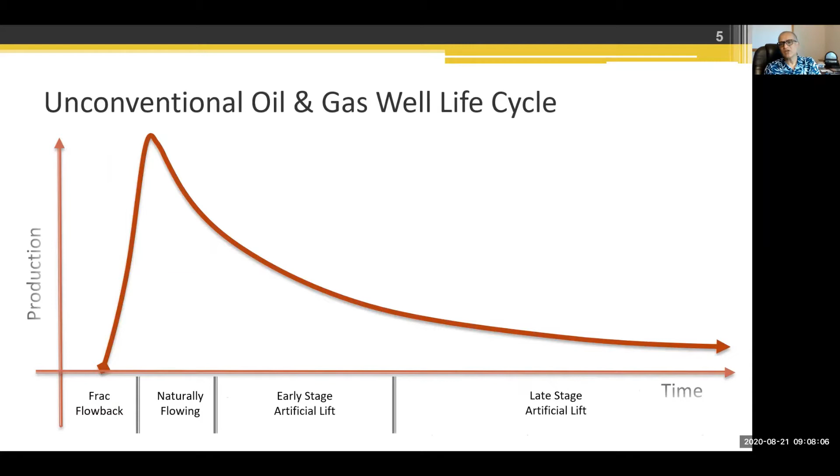But we have to keep in mind that this production decline is what forces us to think about artificial lift. Now, if the question comes up, how many wells in the world are in artificial lift?

The statistics in the US has been fairly constant. World Oil has stopped publishing the statistics since 2018 or so, but roughly every year they come back and say that between 500 and 550,000 wells in the US are on artificial lift. This number has remained constant in the US, and my gut, based on the estimates I see in the literature, is that this number has not changed even after 2017 or 18. On the contrary, that percentage might have gone up, I would think.

Worldwide, this is an estimate from one of the service companies in 2013. The numbers in the US, it says about 540,000 or so. My estimate, based on my consulting work and collaboration with other partners in the world, is that the numbers in the US are fairly static, but the rest of the world, it is increasing rapidly.

For example, I'm working with one Middle Eastern national oil company, and we are looking at just 1,800 artificially lifted wells in one country, and that's just one lift type. I estimate that particular company, that particular country, has more than 2,500 wells on artificial lift, whereas here we are showing almost the entire region having 2,600. I was giving part of this talk in Argentina, and I was pointed out that in one particular basin, they have more than 30,000 wells. So my point is that worldwide artificial lift well population, if I had to make a guess, is close to 1 million or so. And that tells you how important this technology is to the bottom lines of operators.

So why do you need an artificial lift system? You need it in greenfield and unconventional settings for production acceleration. Otherwise, you can say we have field development changes, infill drilling, EOR strategy changes - that's when you'll want to put artificial lift. But the conventional view has been that we need it whenever we have tired production, reservoir pressure declines, water cut increases - that's when things get difficult. I'll come back to this in a minute.

So we need artificial lift to help tired production. But more and more, we are seeing that artificial lift is also used to help green production, meaning for production acceleration. Part of that is also production optimization, when we try to do that.

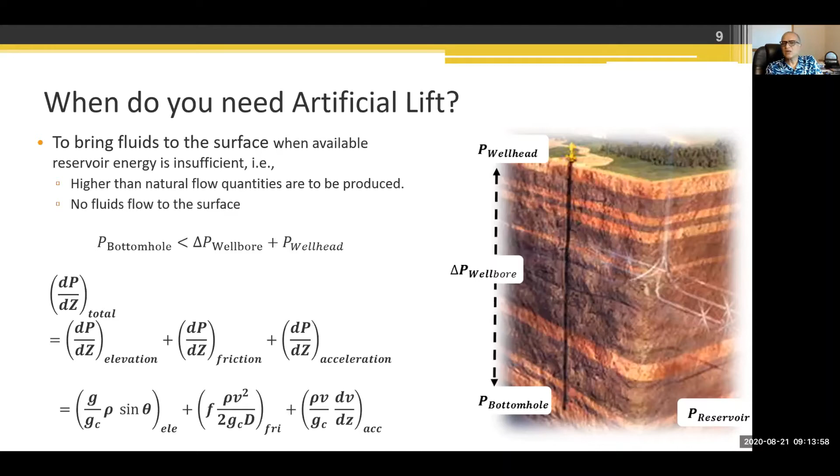So this is the only equation that I'm going to show in this presentation, just to make a point that this is all about the hydraulics of artificial lift. And you have to throw in some electrical engineering or some mechanical engineering, depending upon the lift method that you're looking at. Here is a picture of the subsea.

It is slightly more challenging, but the principle remains the same. You have to account for the well bore losses. In case of subsea, you have to account for the losses from the seabed all the way to the top side. But fundamentally, all you're trying to do is provide what is considered additional total dynamic head, or TDH. So this is one new term.

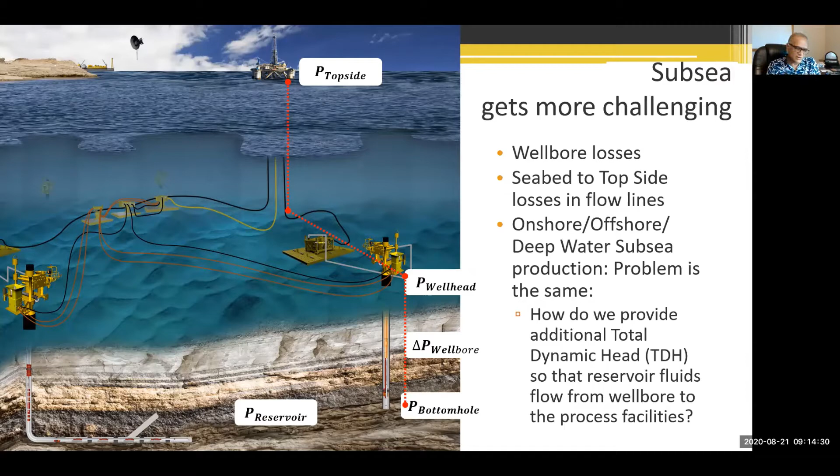You said, wait, you never talked about TDH. What is TDH? Okay, so TDH is, as this picture shows, you have one boundary, which is the reservoir pressure, another boundary, which is the wellhead pressure. Now, this wellhead pressure is influenced by your surface facilities, what type of flow lines you have, what type of separation pressures do you need to hold. So these are the two boundaries that I would keep focus on for the time being.

Then as the fluids flow through the reservoir, you have bottom hole flowing pressure. Most of the artificial lift engineers, they focus on the hydraulics in this area, right? And they typically use a simpler expression for the reservoir flow, which is some kind of Vogel expression or straight line PI in some cases even.

So the artificial lift design or the planning problem is about figuring out how much of this total dynamic head we need to provide. It's not only a design and planning problem, it's also an operational problem, in the sense that once you have lowered the artificial lift in the system, you have to also keep tabs on it, that does it continue to provide this total dynamic head as was promised or not.

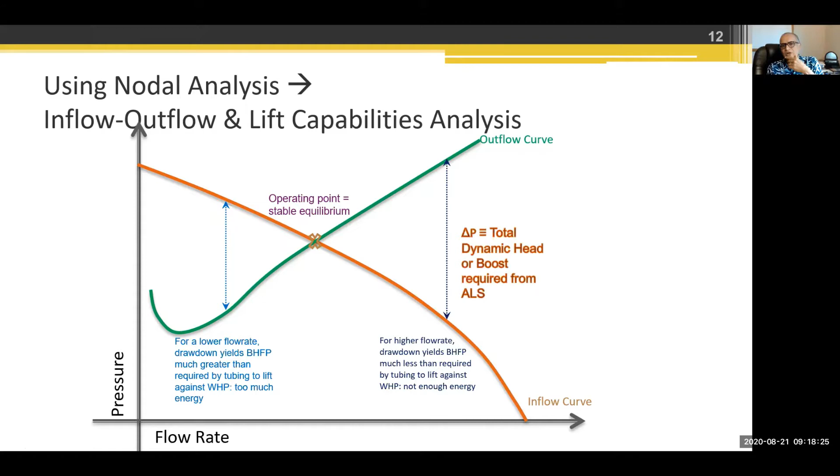So instead of producing this quantity, let's say you want to produce this quantity, then this much of additional boost you'll have to provide. So this is the total dynamic head or boost required from the artificial lift system for that particular flow rate. The actual picture is slightly more complex than that, but for the purpose of our discussion here, this is what I'm talking about.

How one can decide on the lift capabilities or what are the lift requirements, but the nodal analysis is the tool. And again, I cannot emphasize this enough, any of these plots are just at one point in time, meaning one set of conditions: one reservoir pressure, one wellhead pressure, one water cut, one gas oil ratio, one tubing size, on and on. As we all know, things do change. And what changes? I'll come to that in a few slides.

So now let me go to the second part of my presentation where I'll give you some introductory, now that we know why, what, where, when, how of the artificial lift, I will now focus more on how. So I'll give you some idea about what are the different types of artificial lift methods, what are the typical surface and downhole equipment requirements, and some considerations.

This is the part where we'll be kind of sitting in the bullet train as the different stations will pass by. Your takeaways from this section should be that these are all good lift methods when you apply them in the right context. That is one of the biggest problems. Most of the time, people have this mindset that just drop it and forget it. That is what we want to do.

But in case of lift method, what may be good today may not be good tomorrow or over the entire lifespan. So we have to be vigilant about our lift choices, lift operating modes, and lift changeovers whenever any condition changes. Meaning we need to understand our reservoir, we need to understand our field condition, we need to understand what is happening not only in the wellbore but around the wellbore. And this is one area where the lift community is also becoming more and more aware of some of the shortcomings of the approaches.

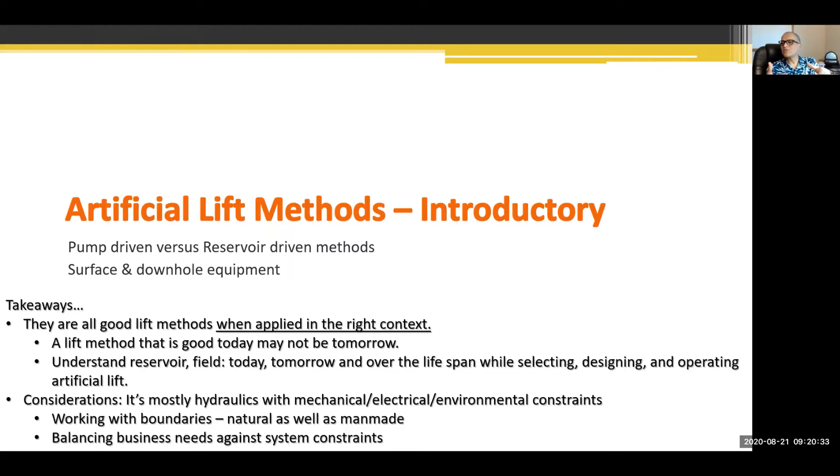So consideration, again I'll repeat this, that most of these lift methods require some mechanical, electrical, and environmental factors. And by environmental, I mean broader than just the Greenpeace movement. We are talking about what is the environment inside the wellbore, what type of corrosivity conditions are there, and that is what dictates what type of chemical program you need, what type of material selection you have to make, and so on.

So when you think about artificial lift method, traditionally what you're looking at are about 7 pictures, but effectively there are 8 lift methods. And I'll put the things in motion. The first one is the rod pump, that is the ubiquitous symbol of the industry, and that is where the maximum number of installations are in the world on this lift method.

I'll not spend too much time describing each lift method. I'm just trying to bring up the picture to give you an idea about what type of different downhole pumping motions occur with different lift methods. So the second one in the middle of the screen right now you're looking at is progressing cavity pumping, or PCP. The third one is the electrical submersible pumping, and this will be in the loop, so you'll keep on seeing what is happening.

The fourth one is hydraulic jet and hydraulic piston pumping. The fifth one is the gas lift. The sixth one is the plunger lift. The seventh one is capillary injection. Let me cut down on some of these volumes here.

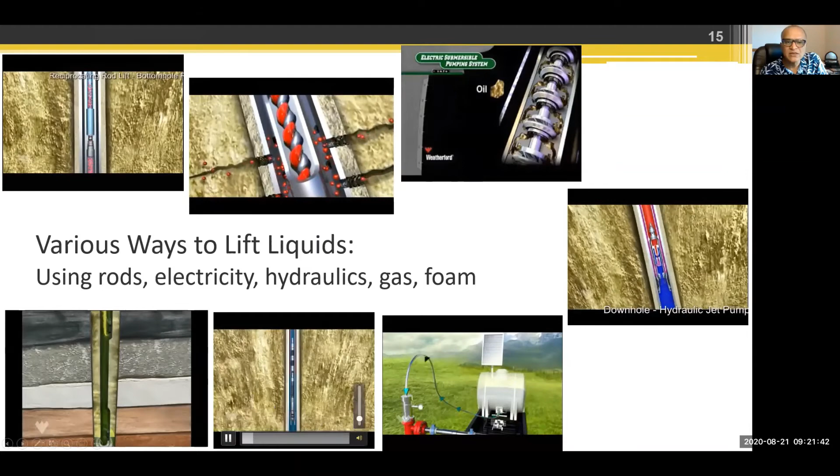Okay, so I'm going to keep this slide for slightly longer than what I would, just to give an idea about how these different lift methods have different surface setups and downhole setups. And we'll, as I describe the other individual lift method, kind of pay attention to that - that if I have to use one particular lift method, do I need a workover rig or can I use it with wireline when I have to repair it?

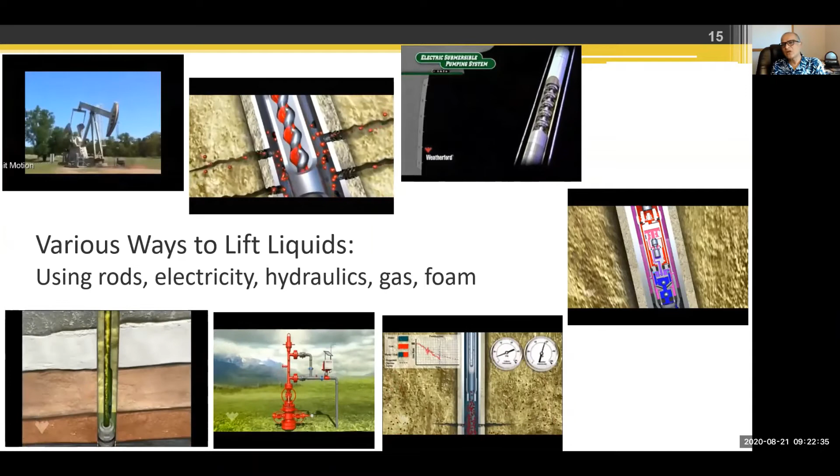And these are the considerations that production engineers need to constantly work with when the lift system is in operation. And here is one thing I'll tell you: most of the production engineers are not traditionally taught these things. They somehow learn it from the old field hands. Because when you go to the engineering school, even if you go to petroleum engineering school, what you're taught are typically just some of the outlines. You're taught some of the design processes very superficially.

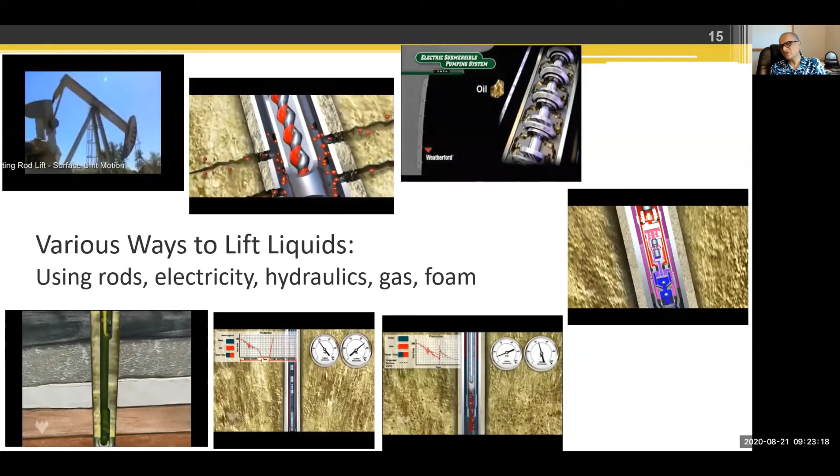I know that because I'm teaching one of those artificial lift classes. But when the same engineer goes to the field, all of a sudden they are exposed to so many field conditions, so many constraints that they somehow get lost, and they end up making suboptimal choices in spite of that training. This is one of the things I've been constantly discussing in the last 15 to 20 years of my teaching all over the world, not only artificial lift, but different nuances of that.

Just a sec, I see something going on in the chat. Hopefully I'm not expected to answer those right now. If we can keep those questions until the end, that will be good. Or, I don't know, what is our protocol? Are we breaking somewhere in between for some questions, or do you want me to say that we can have questions at this point? No, Rajan, as you go on, people can put their questions in the chat anytime, but once you finish your presentation, after that we'll go with the Q&A. Okay, perfect, very good, thank you.

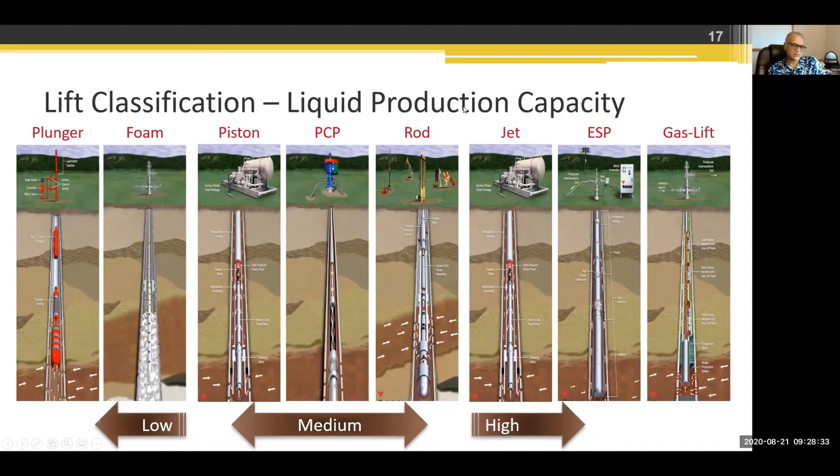Okay, so now I've been talking too much, so there's a quiz for you. Which lift type has the most installations? We're not going to ask you to type your answer. Just pick one of the 8 lift methods we've discussed, which I have listed here, 1 through 8. Mark your answer in your head. Which lift type has the most installations?

And the answer, if you say rod lift, then you are correct. So please pat yourself on the back for me.

The second question is, which lift type gets the most capital? This question came up because I was working for a service company, and we were selling equipment, so we had to keep a tab on which lift method was being preferred. Again, the choices are the same 8 lift methods. Which lift type gets the most capital? Meaning, if you are running a service company, how many equipment or how many millions or billions of dollars of equipment would be sold in which category?

So that is the question. This is on an annualized basis, let me clarify that. And if you answered ESP, that is correct.

And if you see Baker Hughes, Schlumberger, and Weatherford, where they're getting most of their revenue in the artificial lift segment is ESPs. That goes back to my previous slide where I said ESP gets the most capital. To support it further, what you're looking at is again courtesy of the Spears and Associates research report.

What you're seeing is that out of 100% capital allocation year to year, the largest one is ESP, and it has been roughly about 50%. This goes back to 2005. In between, during 2012, 13, 14, rod lift tried to gain some market share, but it fell back, as you can see here.

So ESP is the one that consumes most of the capital that people invest in. The question Rafat asked was what I mean by most capital: if you add up all the spend on a year-to-year basis, the spend on ESP is the highest. It is not just that the technology is more expensive. We can have more discussion on that during the breakout.

Okay, now I have another question. Which two lift technologies produce the most oil? Rod lift, gas lift, PCP, plunger lift, ESP, hydraulic jet pump, piston pump, and foam lift. If you are locked in your votes, I'll move forward. The answer is gas lift and electrical submersible pump.

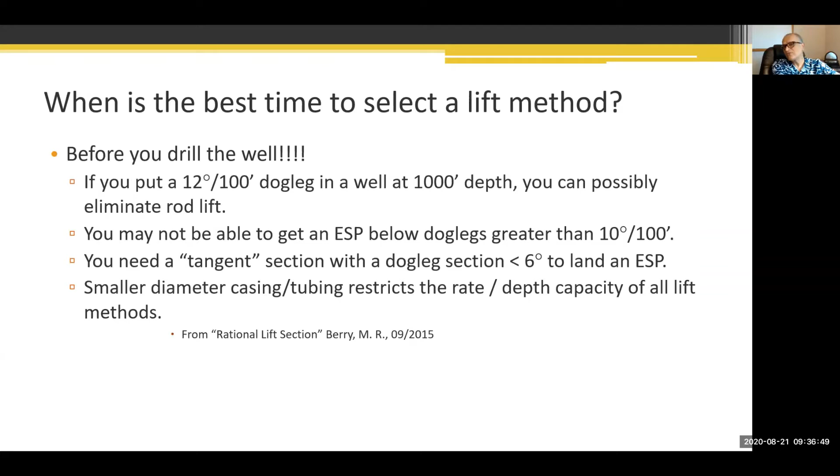So the point is that before you drill the well, you should be thinking about lift methods. Lift methods should actually be part of the field development planning process.

When you think about artificial lift, whether at the selection stage, design stage, or operational stage, you have to look at which type of asset you are operating in: mature field, greenfield, unconventional. Then where this well is located—onshore, offshore, subsea, hot or cold. By hot or cold, do you have cyclical steam stimulation or steam assisted gravity drainage going on? Believe it or not, when I was visiting Kenya, I came across geothermal wells where they were also using ESPs, and those geothermal wells can have temperatures upwards of 200 degrees Celsius.

So you have to think of the location where the artificial lift would be lowered. Location is also important in the sense that if it is very remote or at the top of a hilltop, how do you bring the equipment, or how would people access that location on a regular basis? Then you have to think about what type of PVT and phase envelopes the well would be dealing with year to year—is there too much or too little gas, lots of water coming in, is it heavy oil or light oil, is it sandy oil, or what are you going to do about the nasties like H2S, asphaltene, CO2, and so on and so forth?

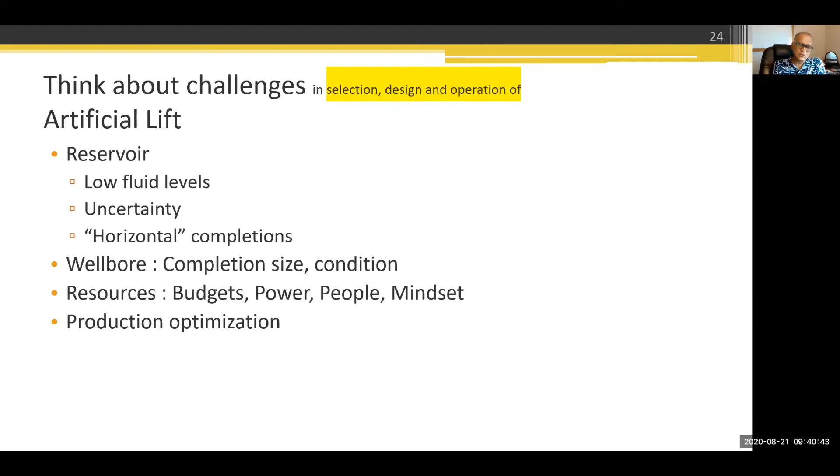So what are the time-related factors that you need to take into consideration when you're talking about selection, design, or operation? As we know, with time, reservoir pressure, productivity, and production is going to go down. Appetite for capital expenditure is going to go down. And then you have competing demands from completion changes, surface facility changes, and there might be enhanced recovery approaches that would require also some CapEx, right?

On the other hand, on the PVT and phase envelope side, you have water cut, GOR, viscosity increasing as the gas comes out of solution more and more. Wells and facilities would age, meaning you have integrity issues, you have flow assurance issues, and then you have to take care of corrosion, scale, sand, paraffin, asphaltene, hydrates, depending upon your environment. So these are all the factors you have to keep in mind as you are designing, selecting, operating artificial lift, or thinking about switching from one to another lift method, right?

Some more factors, as I already touched upon, people and money aspect earlier: your need for this operating resource is going to go up as the wells age, facilities age, right? Whereas the availability of qualified operating resources will go down. Think about it - as you look around operating companies, where are most of the qualified people sitting? In the field development group. And once the field is in operation, what quality of people are sitting in the production side of it? You do not have as many, unfortunately, at least that has been my observation. And then, as I said earlier, appetite for adopting different approaches, if it doesn't go down, it does not change. That is what I see, right?

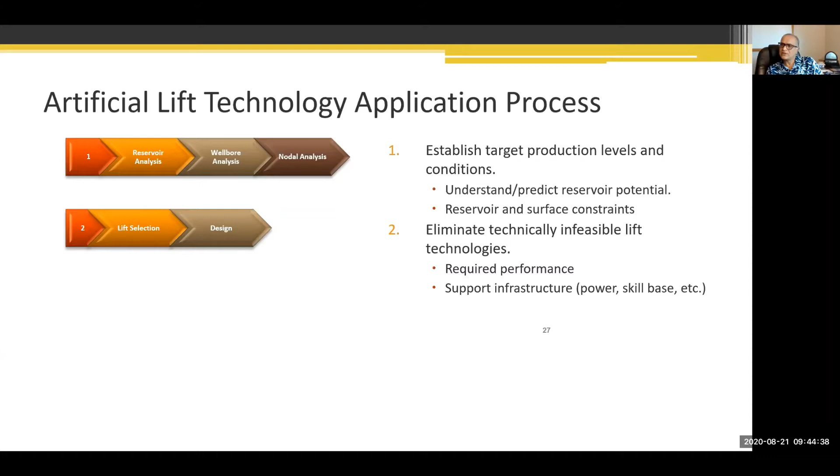What I'm seeing often is that this design function is being transferred increasingly to the service companies. Operating companies are saying, hey, you go and do it. Now service companies have different competing pressures. I was part of that, so I know what could be positive and negative there. That's where I'll stop with my comment.

Then comes the economic evaluation. You have to look at not only acquisition but training cost, installation costs, how we are going to change our people to adapt to the new lift mindset if we are putting in new lift. What are the operating costs? What is the reliability of the equipment? How are we going to replace them if needed? These are all considerations that need to go into artificial lift technology, whether you're selecting it, switching over, or already operating it.

And the final part, the optimization approaches. This is where digital oil field related concepts come in, and I can start throwing all the acronyms I've alluded to: AI, ML, dashboards, edge devices. But the idea is getting access to how my well is doing now, what I need to do so things do not fail, and what I need to do so things continue to work the longest possible.

If you're interested in pursuing this further, this is a list, a rather incomplete list, of commercial software available out there. Notice that there is not just one software that addresses most of the lift methods. Somebody may agree or disagree with me, but in my experience, each software will have its own niche area, and this landscape is changing.

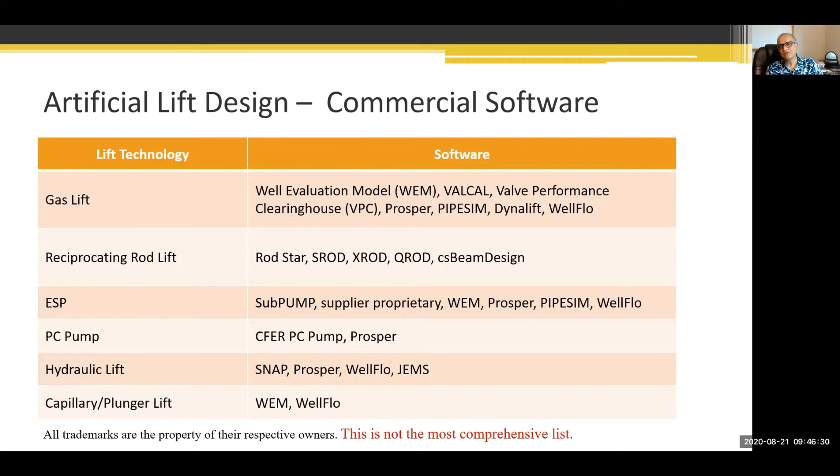Having said that, I must also remind that the vendor community, the people making this equipment, have come a lot farther and are being constantly challenged to push these boundaries even further.

So what I was trying to point out here is some of the lift optimization equipment. For all purposes, you are seeing that this is a normal wellhead, except there is some additional line going to the backside or on the casing side, if you see here, right? And that is the injection gas.

Okay, so gas lift is the first lift method, kind of an extension of a naturally flowing well. In a naturally flowing well, the fluid column weight is reduced as the formation gas comes out of solution with the change in pressure and temperature, as you're seeing on the left side.

Now, in gas lift, what we're trying to do is enhance that process by injecting gas - most of the time natural gas, shown in green here - into the casing-tubing annulus. That gas enters the valve bore through a special configuration called a mandrel, and there's a device, the gas lift valve. The purpose of the mandrel and gas lift valve is to regulate the flow of gas inside the flowing stream, which in this case happens to be the tubing.

Now keep in mind, gas lift can also be applied in reverse configuration, meaning you inject the gas into the tubing and produce the fluid through the casing-tubing annulus. So if somebody tells me their gas lift well is producing more than 6,000 or 7,000 barrels per day, most of the time I can bet money and not lose it by saying that's an annular completion, meaning the production is coming out of the tubing-casing annulus.

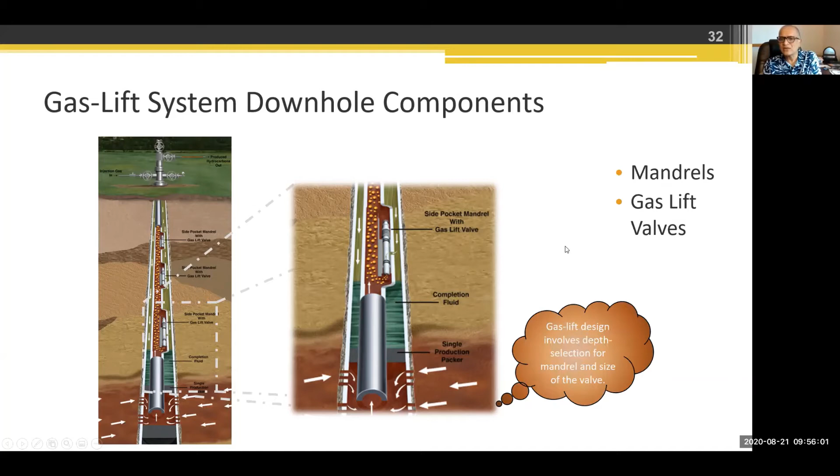So the design problem for gas lift, as far as the wellbore is concerned, is at what depth we should lower this mandrel, what size of valve we should lower in, and what should be the orifice inside that gas lift valve, and what type of gas lift valve. Other design decisions could be what should be the available injection pressure, because that also determines at what depth we can lower it. And then there could be a whole host of other decisions, what type of compressor you have to use. But this is not my gas lift class, so I'll just stop myself. So the design involves depth selection for the mandrel and size of the valve. That is just one simple thing.

Most offshore installations, or installations where it is expensive to service the well by workover, would go for retrievable mandrel type of installation. Most onshore wells go for conventional mandrels because conventional ones are cheaper.

Here is a brief outline on what type of wellsite gas lift equipment there is. This is more of an advanced setup. It is not as advanced as I would like it to be, but still it is advanced. Most of the time we have some type of two-pen chart recorder. That was in old days. If you are old enough to remember that, then join my company.

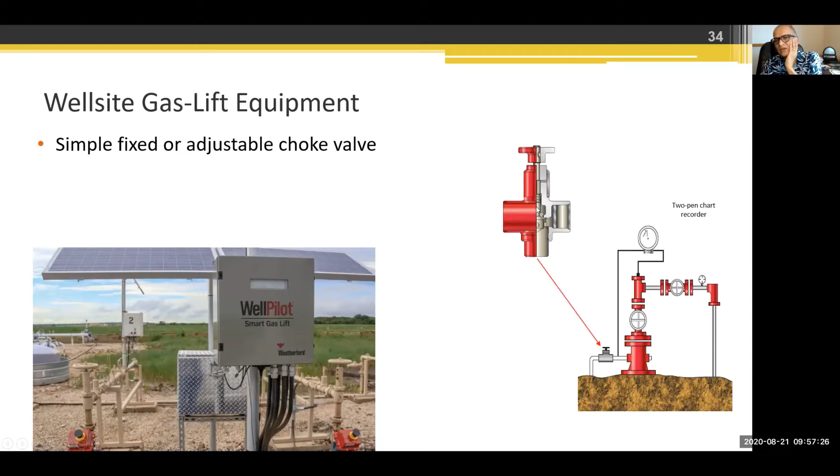And then you have some sort of injection choke here. Now this choke could be manual or it could be adjusted from a remote location. There could be a time cycle controller based choke. The whole function of this choke is to regulate the flow inside the casing-tubing annulus, and it is managed by measuring the differential between the tubing pressure and the casing pressure, and such. So this is a brief intro to the gas lift.

And here you are looking at the gas lift wells on the pad. What you're looking at here is all the measurement related to gas lift injection quantity, how much we are injecting in each of these wells. That's what you're seeing here. So this pad-based development requires you to have some compression facilities on the pad itself, unless you have some centralized compression. And these are some of the debates going on in the production engineering community, particularly as we now have these super pads coming up with 12, 15, 20 wells on one pad and so on and so forth.

There are two types of gas lift: continuous gas lift and intermittent gas lift. Most of the time when people say gas lift without qualifying it, they mean continuous gas lift, meaning you are injecting gas into the production stream continuously. In intermittent gas lift, you are injecting intermittently.

So what do we want to achieve in continuous gas lift? You want to inject gas through the lowest possible gas lift valve. Lowest possible gas lift valve, that should be our goal. We want to prevent multi-point injection, meaning we do not want to waste gas whereby gas enters at multiple points at the same time.

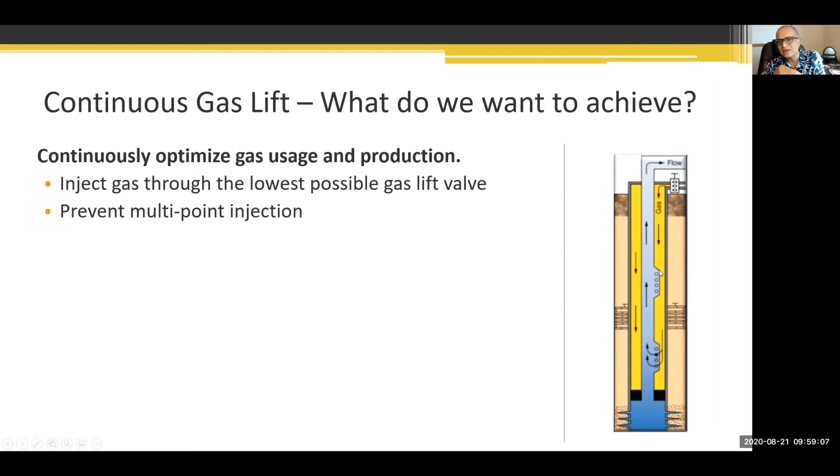We want to enter it only from the deepest possible point, because that is when you are utilizing the energy most. You want to provide the optimum amount of lift gas. Too little gas means your production will not be coming out as much, so there is a production deferment. Too much gas, you're wasting your compression energy at the surface, and that gas is not contributing. On the contrary, in some cases it can contribute to friction losses that you do not want.

So this whole slide talks about what is a continuous gas lift optimization problem. Details are always devilish, as somebody says. There are lots of things, but gas lift is one lift method where you have to have a very strong understanding of hydraulics as well as reservoir performance and surface network performance.

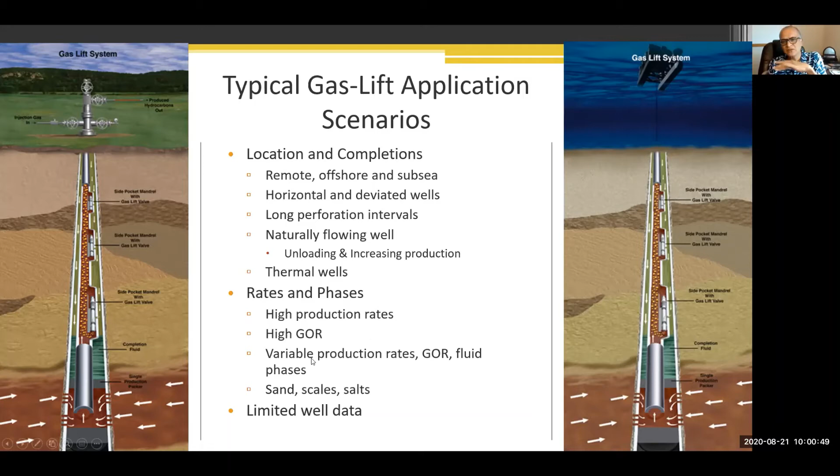Typical gas lift application scenario: on the left side you are looking at a picture from Weatherford about surface onshore gas lift. On the right side you are looking at some subsea gas lift. So the point being, gas lift has been used in all parts of the world, remote locations as well as subsea locations. It is used in long perforation intervals. Naturally flowing wells also use gas lift on an intermittent basis. In lieu of swabbing, people sometimes just trickle in some gas with a nitrogen cylinder to kick off the well, for example. In thermal wells also they use gas lift, and these are the typical gas lift application scenarios.

High voltage situations - you're looking at voltages in excess of a few thousand volts, downhole voltage. So this requires qualified electrical engineers' intervention in addition to the petroleum engineers' intervention. What you're looking at is a cable that is strapped typically on the outside of the tubing, and that cable goes all the way to the bottom. There's a motor here.

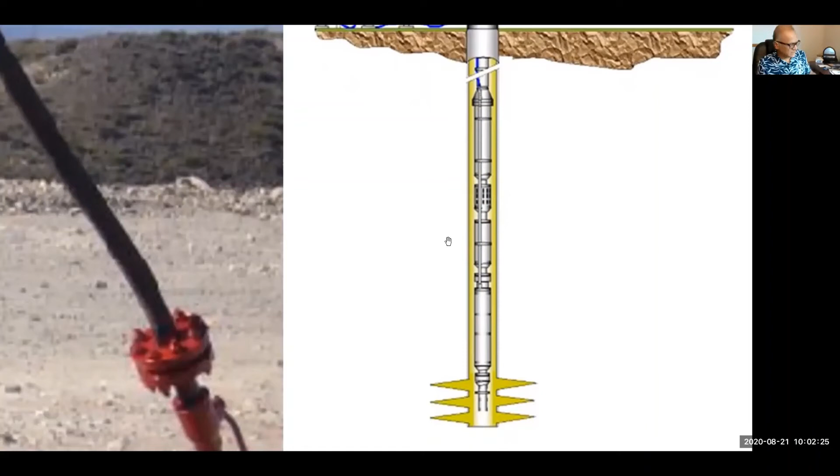Starting our journey from the top, there's a cable that comes outside from the tubing. At the end of the tubing, typically the entire ESP assembly is hung. The topmost part of the assembly is called the pump - that is where most of the lifting work happens. Then there is an intake. There may be a gas separator device here also. Then there is something called a motor seal or motor protector, and then you have the motor. So the motor is at the bottom in the conventional setup.

And then you have a downhole sensor package. ESP being some of the most expensive installations from the beginning, they were the first artificial lift method to get downhole sensing packages. Nowadays people are lowering downhole sensing packages in most all types of lift methods, but ESPs were the first one. The reason being that the power cable can also carry the signal from downhole to the surface. So reservoir engineers also love ESPs because they get to keep their fingers on the pulse of the well.

Coming back to the machinery itself, it's a submersible pump like what you might have seen in some water-producing wells, except these are highly sophisticated devices. Visualize you have about 5 to 6 inch outer diameter, and you're trying to generate a total TDH, or total dynamic head, to the tune of almost 2 to 3,000 PSI, which is equivalent to about 7,000 or 8,000 feet of water column. These are very smartly engineered, and the basic design has not changed over the years. The material of construction has changed a lot, and systems are now available that can handle some of the harshest conditions, and can also operate over the widest range of flow rates and flow conditions.

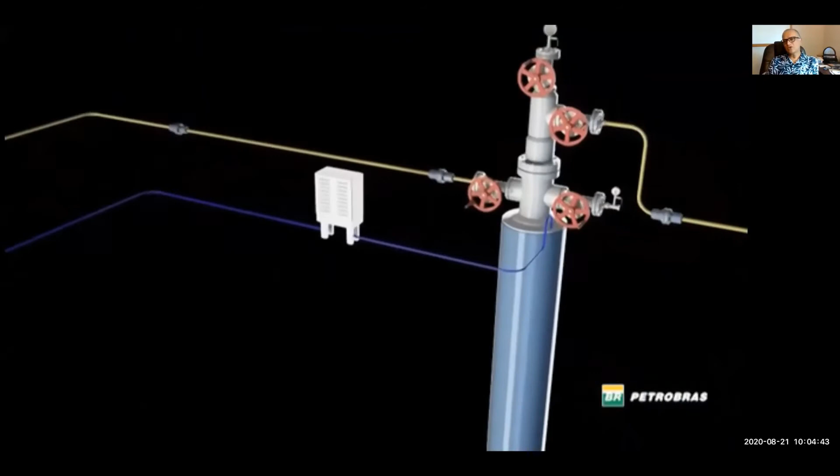Here is a small animation that was originally prepared by Weatherford, and then Petrobras went in and made it with slightly better colors and better music. What you're looking at here downhole is how the cable has come in, shown in blue. You have the pump, you have the separator, and you have the motor. You'll get some words in Portuguese here.

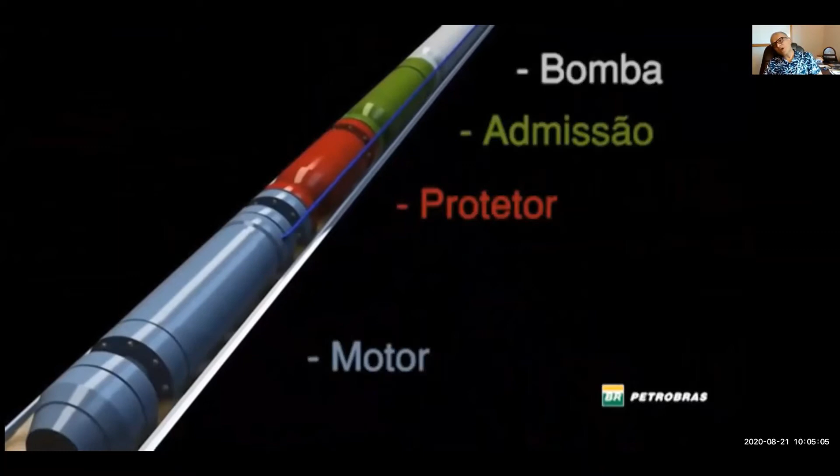Bomba is a pump, admissão is intake, and protetor is the protector or seal section.

So the motor is energized, and a shaft inside the motor starts turning. This shaft is coupled to the shaft inside the protector section. The expectation is that the gas and oil mixture will come inside the intake section, shown here in green. If there is separation going on, the gas will come out on the annulus on the back side. And now you have a pump section, which is a centrifugal pumping device, basically. That is our very quick understanding of how this device is supposed to work.

So the takeaway is that you require a significant quantity of electrical power. You have to connect those devices inside the wellbore, which are hung at the end of the tubing. Meaning, if you have to change the ESP or it fails, you have to call a rig on the well site. This has been one of the biggest concerns of some of the companies of the world, Saudi Aramco's and Kuwait Oil Company, companies that have some of the largest electrical submersible pumps, including some companies in the North Sea as well as Gulf of Mexico and Brazil.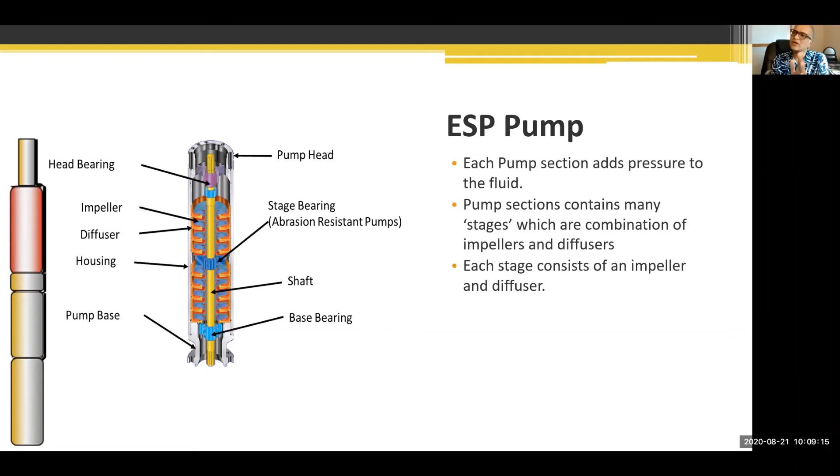Okay, here is a bit on electric motors. There are significant advances in this technology. Traditionally, it has been induction motors, squirrel cage, 2-pole, 3-phase type of motor, run at 60 hertz here, 50 hertz in other parts of the world. But it can run over a wide range of frequency, and that is what allows us to produce different quantities of fluids from the wellbore if you have what is called a variable speed drive at the surface. The relatively recent advance in this technology has been the introduction of the permanent magnet motor, which is more energy efficient and shorter.

Shorter assembly length is very important because as we go through some of the deviated wellbores, some of the horizontal wellbores with extremely high dog legs, you require as short an assembly as possible. So your question should be, what is the assembly length in this case? It could be as high as 100 feet, 150 feet, 200 feet, depending upon the number of stages you require in order to produce the quantity.

So ESPs have some of those challenges. Of course, ESPs are also used in some of the most challenging environments, like up north of the border, where they are producing bitumen using SAGD, steam assisted gravity drainage, and there the temperature could be as high as 450 degrees Fahrenheit or 250 degrees Celsius. This is where ESP vendors have come up with designs that can operate in those harsh environments.

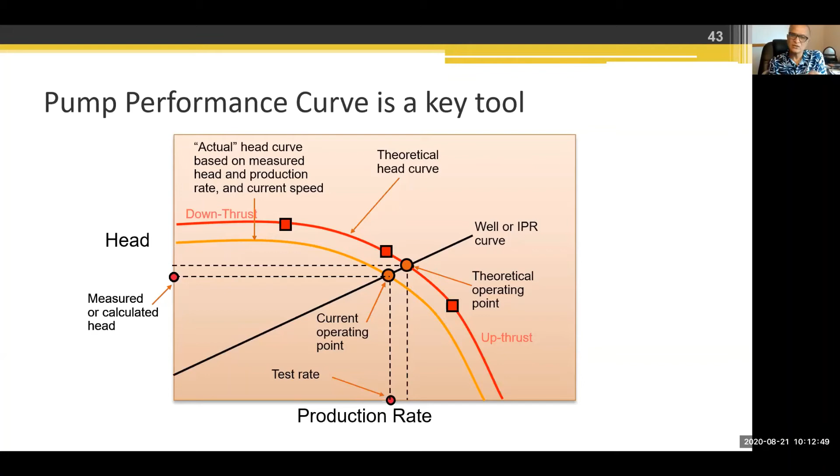You can also keep an eye on pump health. By the way, one of the major initiatives in this space has been ESP failure prediction. If you scan the literature, all these big data analytics firms that come talking about introducing efficiencies will invariably gravitate towards how they can save money by predicting when the ESP is going to fail. I've been involved in one of these projects with a Middle Eastern operator for over a year now. It's an extremely complex problem, but because of the cost involved in bringing new equipment and replacing equipment, people are very sensitive to ESP failure. Not that they mind it failing, it's just that when it fails, they are left with lots of deferred production. So there is a lot of activity going on in that area.

Typical ESP application, as I said, is high volume, that is where ESP really shines. If you are assessing a well that is going to produce upwards of 3,000 barrels, it behooves you to seriously look at ESP. Now, I'm not saying that you should go ahead and put the ESP, but you have to take a serious look at it.

There are competing methods also. ESP is used not only in oil and gas, but also in mining and water wells. Actually, some of the largest ESPs are in mining applications, where those ESPs can remove as much as 150,000 barrels of water out of a mining shaft in a matter of days. As you can see, mining shaft volumes can be significantly higher.

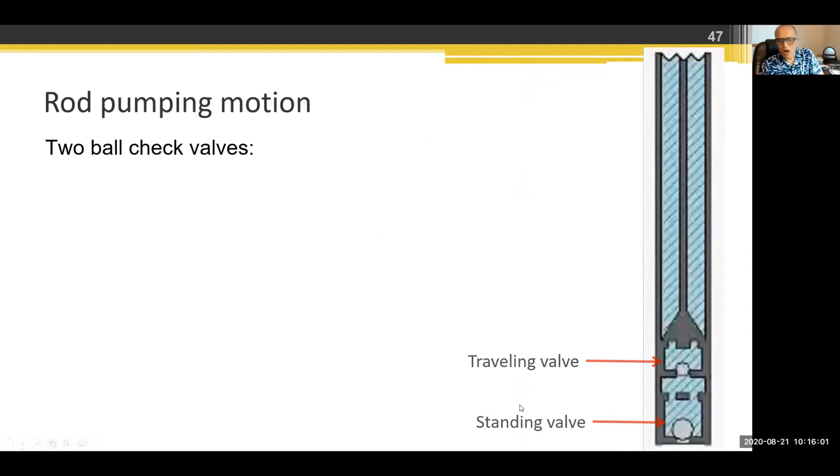So it has 2 valves inside, called a traveling valve and a standing valve. I could not help but show this, how the fluid from below the pump enters into the pump chamber, and then the synchronized motion between these 2 valves, traveling and standing valve, allows transfer of that fluid from inside the pump chamber to above the pump chamber. This immediately tells you that as this traveling valve moves up along with the cage and the rods, we are only producing during what is called the upstroke.

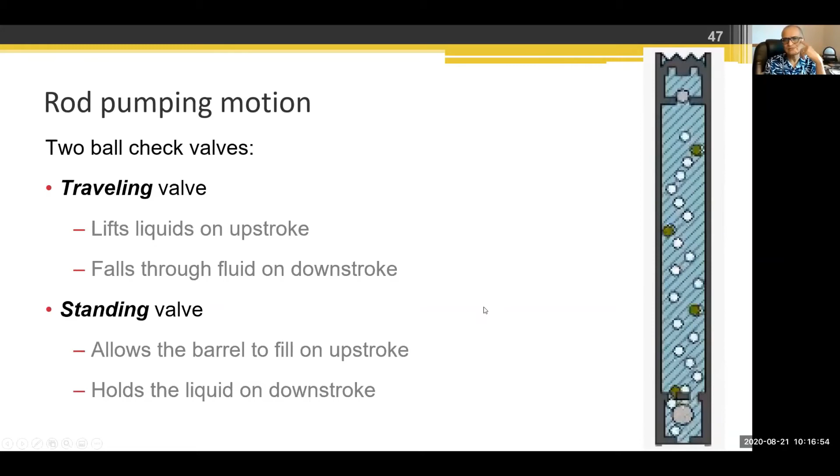Why is this lift method so popular? Because most of the investment for this lift technology is on the surface, that's easily accessible, number one. Number two, the mechanical device is relatively simple. There's a gearbox at the surface, and then there are some lever type arrangements, class 1 and class 3 levers. So all you have to do to maintain this device at the surface is change the gearbox oil on a regular basis, and provide some lubrication for the bearings that are there. That makes this—plus at the end of its useful life, you are still left with lots of iron that can give you some value.

So which part of the world will you not have somebody who can change the oil in the gearbox or grease some bearings? That is one reason why I still come across some pumping units that were developed literally in somebody's backyard in the 1930s. If you go to the Bakersfield area, where Chevron and formerly Occidental were operating, you'll come across some of those older devices that are still working. That's the beauty of this lift method.

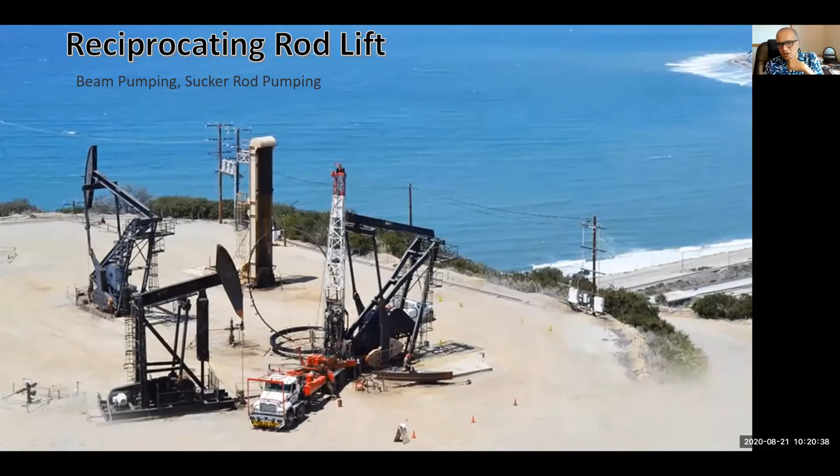So here, similar to the coil tubing setup, they also have a coiled rod setup. There is a gooseneck, and you are literally injecting the rod inside. So that is a different type of rod mechanism. So let me now move further.

So what do we want to achieve when we have a rod pumping machine is you continuously produce as much as the reservoir will provide. This is a key thing, because rod pumping systems are working on wells in this part of the world. Most of the wells on rod pumping do not produce continuously because your reservoir is tired. So you let the influx come in for some part of the day, liquid level builds up, you run your pump, and then you shut it down and let it rest and let the reservoir catch up a little bit. So that is how the majority of the wells work, but then there are some wells where you can produce continuously, right?

And in some cases, if you have what is called a variable speed drive, then you can increase the pumping speed when the well is capable of producing more than the lifting capacity that was sized, right?

Then there are a few other considerations, what is called a fluid pound condition. Especially if you have a tired production, it is possible that as your pump keeps on working, the reservoir would not fill up the entire pump, right? In that case, what might happen is that as your plunger is going down, it will hit an empty space that is not filled with liquid, and then all of a sudden it will hit the liquid. And that is called a fluid pound.

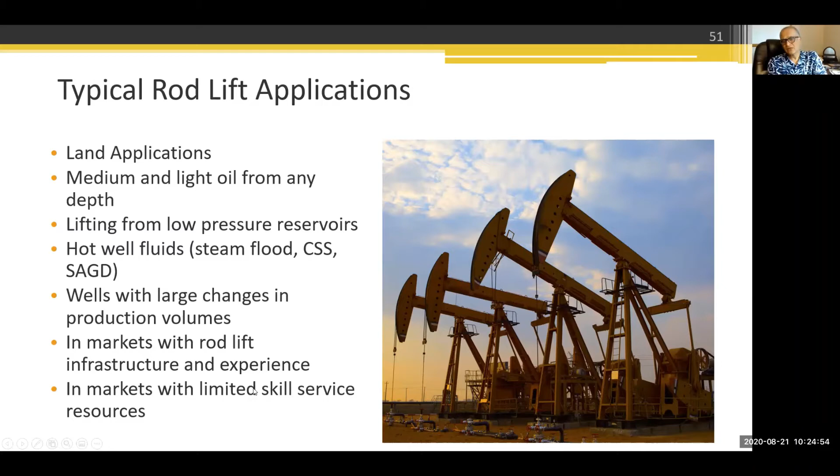This setup is required because you have to route the hydraulic fluid down the wellbore to drive the pump that is basically providing the TDH. What is hydraulic fluid? Most of the time it's water, but after a while it is water mixed with the well fluid, so it is essentially the well fluid.

So when you look at the entire setup, what you're doing in the hydraulic lift is using a highly pressurized liquid, and you are pumping it from the surface to drive a downhole pump. On the surface, you have a setup whereby you can have some kind of separation facilities, with a triplex pump or diaphragm pump that can pressurize the liquid to higher pressures.

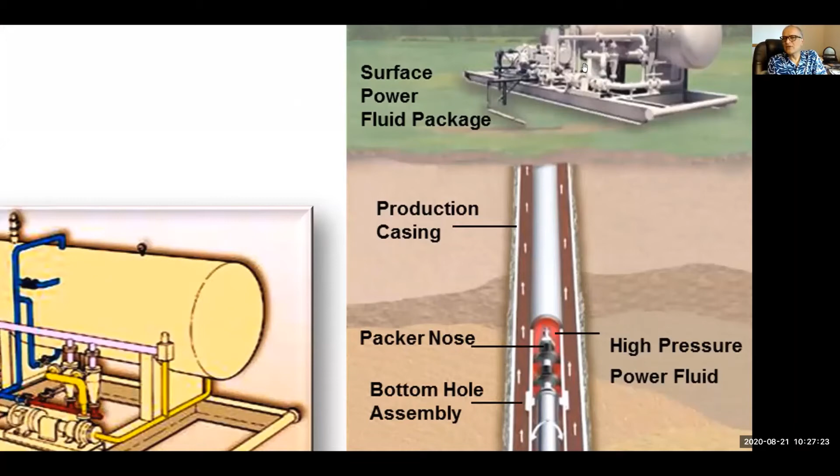Here is another picture from Weatherford showing how, in this particular case, the red color is the power fluid. That's the convention. The power fluid is injected inside the tubing, and there is a bottom hole assembly in which the pump sits, either a piston or a jet pump. The pressure is built up, and you get a mixture of the power fluid with the well fluid, which is coming from the reservoir. So the pump provides the necessary TDH to bring both fluids to the surface.

This lift method was somewhat marginal until the beginning of the century. When horizontal wells and the unconventional revolution started, jet pump particularly became one of the lift methods used heavily for initial kicking of the well, because we are pumping so much fracturing fluid down that needs to be evacuated before production can begin. That is what completion companies often do.

There are two types of pump possible: the hydraulic jet pump and the hydraulic piston pump. The hydraulic jet pump is like nozzle venturi devices used in measurement, relying on momentum transfer from power fluid into the wellbore fluid to get higher TDH. On the right side, the hydraulic piston pump has pistons driven by the power fluid. Both are hydraulic, but the jet pump has the ability to transfer larger volume.

Typically the jet pump is in the upper end of the spectrum, whereas the hydraulic piston pump is in the same spectrum where rod lift and PCP sit. This hydraulic piston pump is good for up to maybe 1,000 barrels or so of liquid production, whereas the hydraulic jet pump can be used for much more—one of the largest installations I know of, offshore subsea Tunisia, was 32,000 barrels per day type of production.

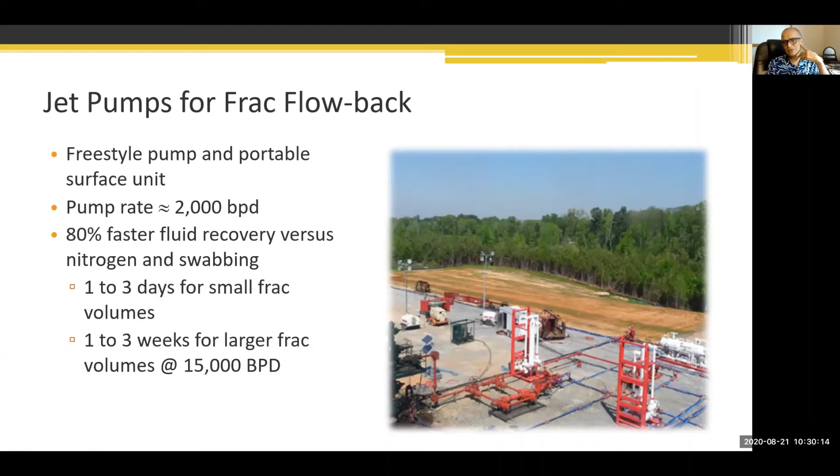The idea is that if ESP is not strong enough, or if ESP has failed, then jet pump can continue to work. The beauty of jet pump is that you can retrieve it just by circulation. You do not require any big workover rig, or you can do it by wireline, but most of the time people do it by circulation. That's why jet pump is preferred in many of these installations.

So that is a brief on the hydraulic pumping method. Now let's move on to the next lifting method, which is a progressing cavity pump. People often refer to this as progressive, and I have a beef with that. I don't think that is the correct nomenclature. It's a progressing cavity, and you will see why I'm insisting on that.

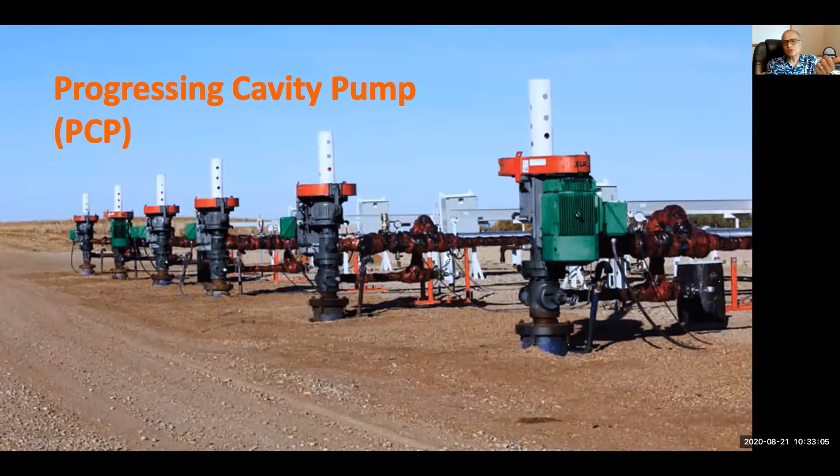Again, what you're looking at is called the drive head at the surface. There is also a polish rod and stuffing box. This rod is rotating, as I said, not reciprocating. Downhole, what you're seeing is a similar rod string, except the couplings used here have a different requirement, because they face a lot more torque variation compared to the sucker rod pump. Then at the end, you have what is called a PC pump, or progressing cavity pump.

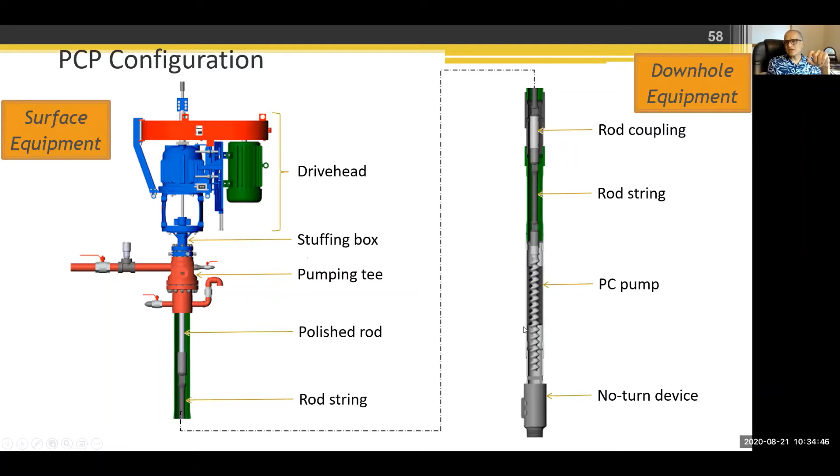So there are two components, as I was saying: this is the rotor and this is the stator. The stator is typically of elastomeric construction, bonded to a steel tube, and this steel tube is hung at the end of the tubing. So just like ESP, if you have to change the PC pump, you also have to pull out. This is a traditional application. Nowadays we have a new application whereby the entire pump is suspended at the end of the rod string, but those are few and far between.

What you're looking at here - the rotor - is typically a helical structure with one lobe, and the stator is a complementing helical structure but with two lobes. Now, if you've worked in the drilling side of the business, you might have seen some of those mud motors. There too you have helical structures like this, but there the number of lobes is more than one.

And that's why the name progressing cavity pump. When people say progressive, it kind of gets to me for that reason, that these cavities are progressive, but here it is progressing.

Okay, so that is the PCP related downhole motion animation that I wanted to show you. As you can see, this is a highly complex motion, so the design considerations are totally different when compared to other designs. This is something you must be wondering as you go through this different lift method, different types of pumps, that how each pump differs from another one in the way they generate the total dynamic head.

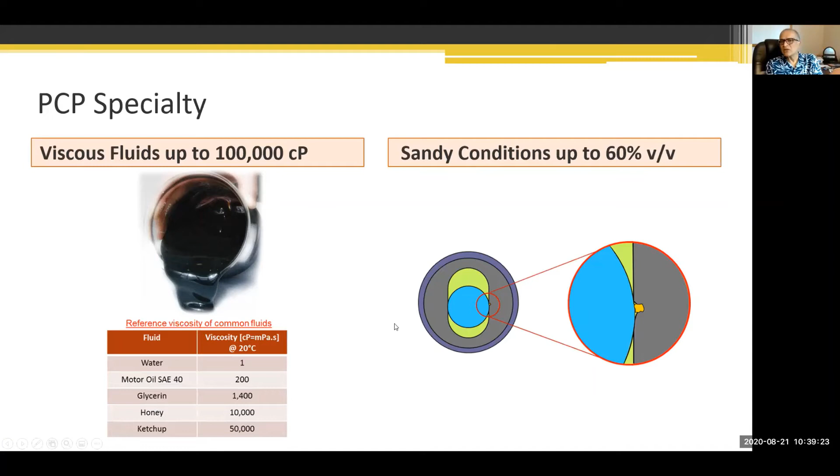I have also seen PCP being used in lighter oil production situations, but there the challenge is finding a compatible elastomer, okay? So the thing about PCP systems is that it is one of the least forgiving artificial lift methods. If you have not done your homework, the PCP can fail in a matter of just a day or two.

But coming back to the PC pump application, just like rod pump, it is also land application, for the same reason, meaning you have subsurface safety valve that cannot close around the rods reliably. It is used typically for heavy oil, but it is also used for medium and light oil. The nasties that really impact the PC pump are CO2, H2S, and BTX. BTX is an acronym for benzene, toluene, and xylene, the aromatics that can impact the elastomer significantly, okay?

To counteract that, vendors have come up with systems where your elastomer is made entirely of metal, so that BTX, CO2, or H2S does not impact it heavily. But those are, of course, very expensive devices, and secondly, it defeats the purpose here. It cannot handle the sandy conditions as well because of the lower abrasion resistance that a metallic stator would have, okay?

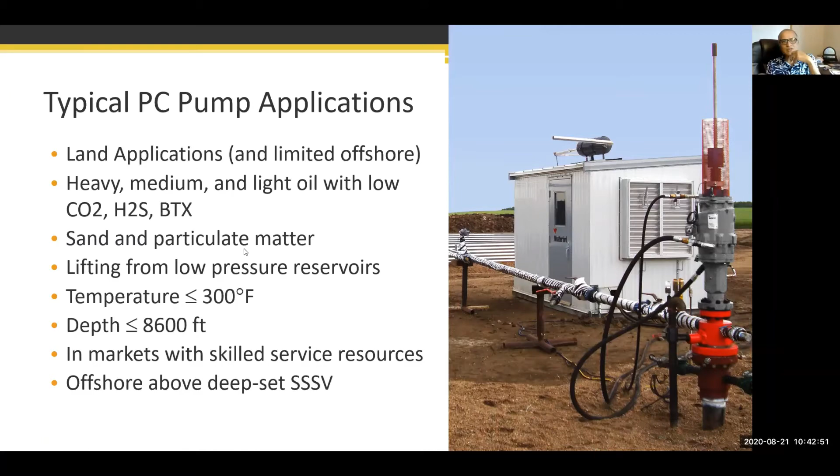So now we are switching gears. So far we have been focusing on all the lift methods that are focused on higher liquid production - and what do I mean by higher? More than 10 barrels per day type of liquid. Now we are going into the gas well territory lift methods.

I'll come back to that hopefully later. But what is the central problem in gas wells? In gas wells, as we all know, there is always some connate water that comes, or even condensate. As the pressure drops and temperature changes, the condensate comes out of solution and it will start falling back because condensates are heavier compared to the gas. If the gas cannot carry the condensate with it out, then over time, you will have more and more liquid accumulating at the bottom.

Initially, gas pressure would be high enough - it will struggle through, come out in bubble form, and it will produce. But eventually, on the surface it will appear that yeah, gas is coming out and there is no problem. But downhole, inside the wellbore, you have liquid accumulating.

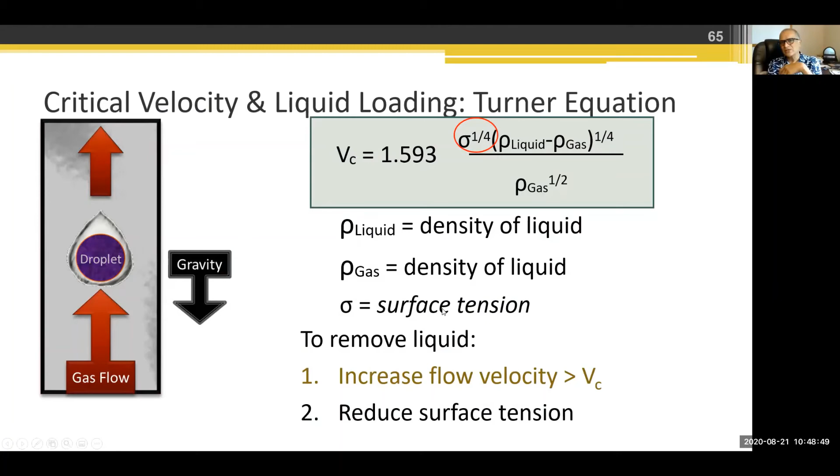So there are two approaches you can take. Either you can increase the flow velocity by decreasing the flow cross-section area through which your gas flows, or you can change the surface tension. You can reduce the surface tension - not increase, sorry, that was a mistake.

So here is one approach called dead string and another is called velocity string. In dead string, what you're doing to reduce the flow area is lowering a tubing which is blocked off at the end, meaning you are forcing the production to go through the annular space.

And as you can appreciate, before lowering the string - let me go back - before lowering the string, your gas was flowing through the entire casing space. This is how most gas wells start their life. Then once you lower the string, you are reducing the cross-section area, you are increasing the velocity, and that is what allows you to carry the fluid out of the hole.

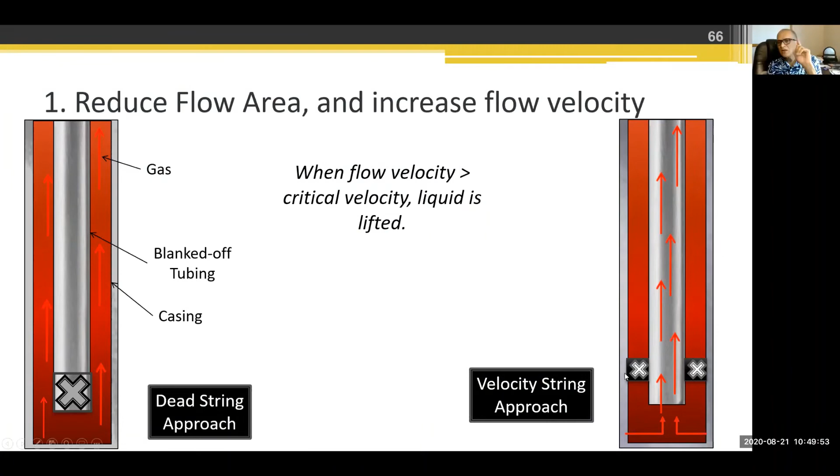In the velocity string approach, it is exactly opposite, meaning you are lowering the tubing just like the dead string, but rather than blocking the tubing, you are blocking the annular space, meaning you are forcing the fluids to go through the tubing. So depending upon how much liquid you are trying to lift, you will go with dead string or velocity string. But we have to keep in mind, these are stopgap arrangements.

And that's where the question comes up of what else we can do to remove that liquid. You can use any of the methods I talked about so far - people have used gas lift, ESP, rod pump, and so on. I'll come to that.

But one thing you can do, and this goes back to the Turner expression where we saw that the critical velocity is proportional to the surface tension - that's where this foam lift comes into it.

What you're looking at is a surface injection of a surfactant. Surfactant is an acronym for surface active agent. So surfactant is introduced into the wellbore, and it can be introduced in multiple ways.

So you can drop what is called a soap stick, literally - rather than bars of soap, you have sticks of soap. Now, soap may not be the same soap that we use to wash ourselves, but it effectively generates foam as it comes into contact with the liquid, and this liquid has to be water dominated. This whole foam lift works when you have water dominated production, because most surfactants are - I'm trying to remember - it's called aquaphilic, water loving.

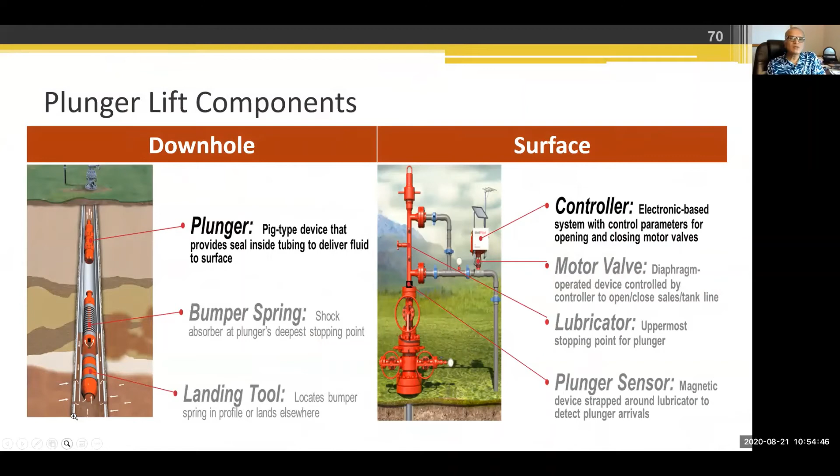Okay, so when you look at the downhole component, you have the plunger. As I said, the plunger looks more like a piston here, or a pig—if you've worked in pipelines, you might have come across pig type devices. So it essentially seals the surfaces so that the liquid captured above it can come to the surface as the plunger travels to the top.

At the bottom, there is something called a bumper spring, which is lowered using wireline methodology. And then there is a landing tool which sits inside a pump seating nipple or some kind of profile. This bumper spring, whenever the plunger goes back down, kind of arrests it here, and there is a spring that absorbs the plunger's shock. So this is the setup inside.

When you come to the surface, as I said, it has a slightly different setup. What you're seeing is called a lubricator—just like you also use a lubricator in gas lift to insert and take out gas lift valves. But here the lubricator stays permanently on the well site, and you can use it to retrieve the plunger when it comes to the surface.

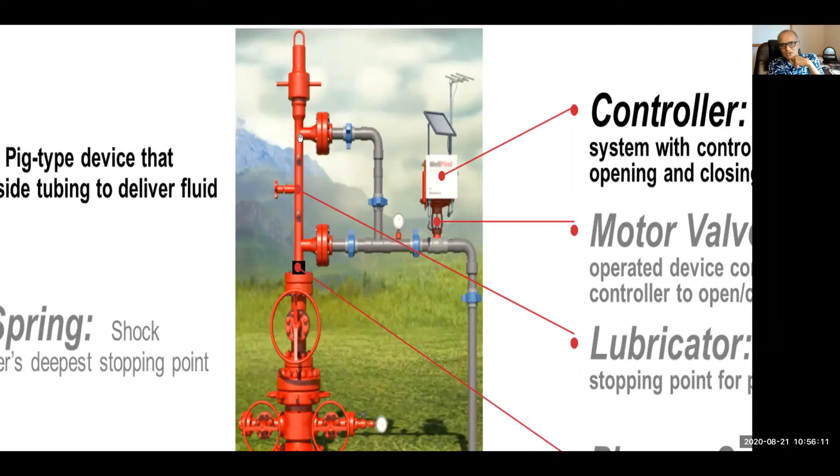And then there are a few other devices. There is something called a flow T. This T section allows the liquid, as the plunger travels all the way up, whatever liquid is trapped above the plunger to bypass and go into the flow line. There's a very important function played by a device called the motor valve. See, plunger lift wells typically fall into that category of tired wells, meaning it has to build up some gas pressure inside the casing tubing annulus so that gas can drive the plunger to the surface. So this motor valve periodically will open.

As the motor valve opens, the pressure here decreases, while the casing pressure built up from accumulated gas starts driving the plunger to the surface. This motor valve is typically driven by a controller, and there's a solar panel because you don't need much electricity at the valve side other than to drive this controller. That's one reason plunger lift is one of the cheapest lift methods, which is why it's so popular.

In terms of application, plunger lift is used to unload wells that continue to load up with produced wellbore liquid, and to reduce the fallback in wells being produced by intermittent gas lift.

Here I'll introduce another acronym for your glossary: PAGL, plunger assisted gas lift. Some people also call it GAPL, gas assisted plunger lift. This is a combination of gas lift and plunger lift, and it has become popular relatively recently as we see intermittent production from unconventional wells—sometimes a large liquid slug, sometimes just gas, then another large liquid slug. That's why people are gravitating more and more towards this approach.

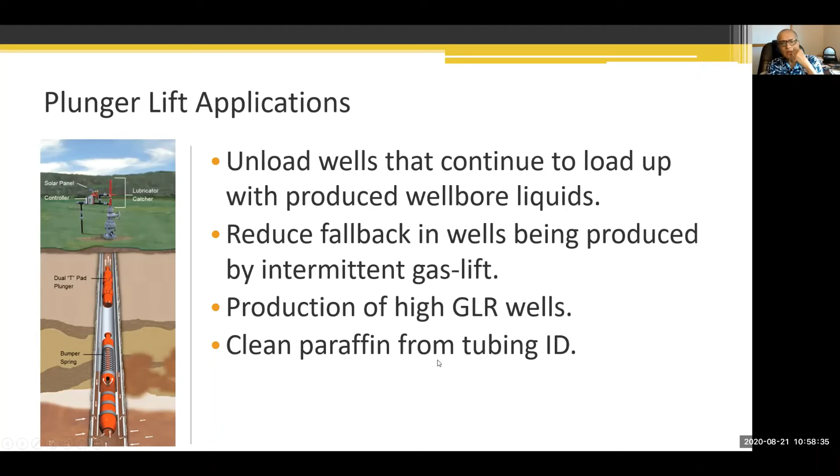Plunger lift can also effectively remove paraffin buildup from the upper part of the wellbore because it fits very tightly with the tubing.

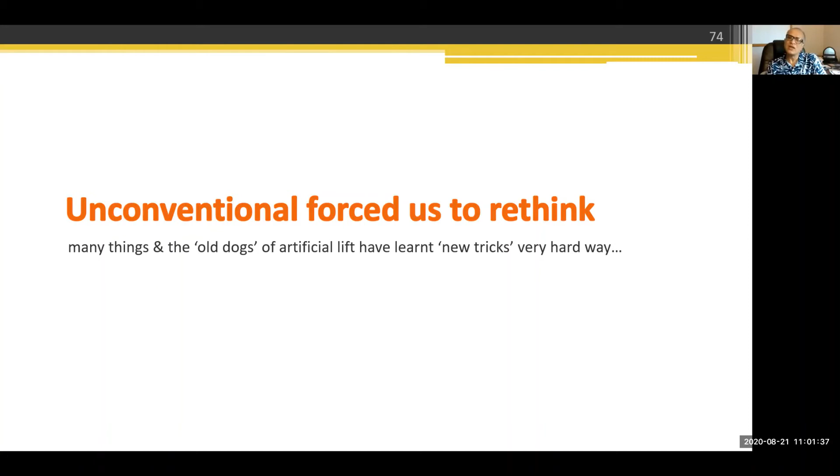So this is change number one. This horizontal well revolution has really made us rethink lots of artificial lift approaches. And by the way, now what you're listening to is some of the slides from my

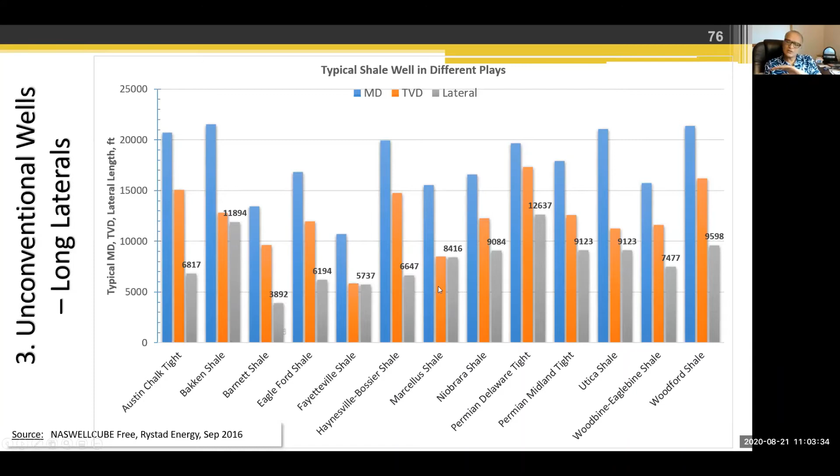Another thing to keep in mind is that what we call horizontal wells are not truly horizontal. Many of them are now classified as toe up, some are toe down, and most of them are what I would call hybrid or porpoising type horizontal wells. Why do I care about mentioning this? Because this type of lateral geometry impacts what type of fluid comes into the wellbore, with what velocity they come, and what is their constitution when they reach the pumping device.

I'm not debating here which type of well geometry is better. All I'm pointing out is that because of these different geometries, the artificial lift mechanisms are seeing some flow structures that they are not designed to see.

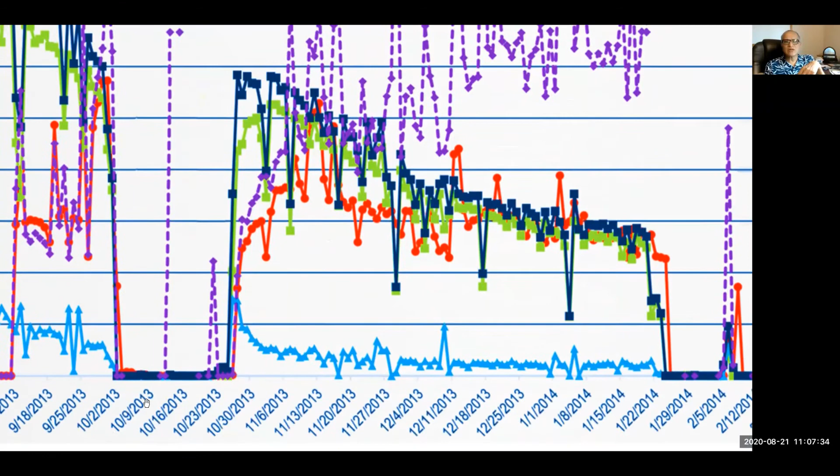First, when you look at the longer term impact, what you're looking at here is actual data from a well, showing the production profile in terms of gas, oil, and water production, and the total liquid production. What we are seeing is that even though the time frame is from September 2013 through maybe February 2014, so about a 6-month time frame, over this period there is so much change in terms of the barrels of liquid that pass through that wellbore.

Now think of yourself, if you are designing artificial lift for this well, at what flow rate would you design? Would you consider 800? Would you consider 1600? What would you consider? This is one of the biggest challenges that artificial lift practitioners have run into with horizontal wells.

There is such a severe change in the production profile over such a short time period. You may recall that for some lift methods, to change the lift method you have to call a rig on the well site. Are you going to call a rig every 2 or 3 months? Even though onshore rig costs are reasonable, it's still a lot of hassle and a lot of deferred production. That's what happened in the case of this well.

There is a first failure of the ESP here, a second failure here, and a third failure here. Again, I'm not saying ESPs are bad. What I'm saying is that because of such severe changes in the flow structures, the equipment struggles and fails because the designer could not envisage all the changes that were going to come to that device in a 3 month time frame.

And here, what you're looking at is a short-term change... oh sorry, I think I did something I didn't want to do. My apologies, I'll share again. I was trying to do something smart and it backfired. Okay, now you should see my presentation again.

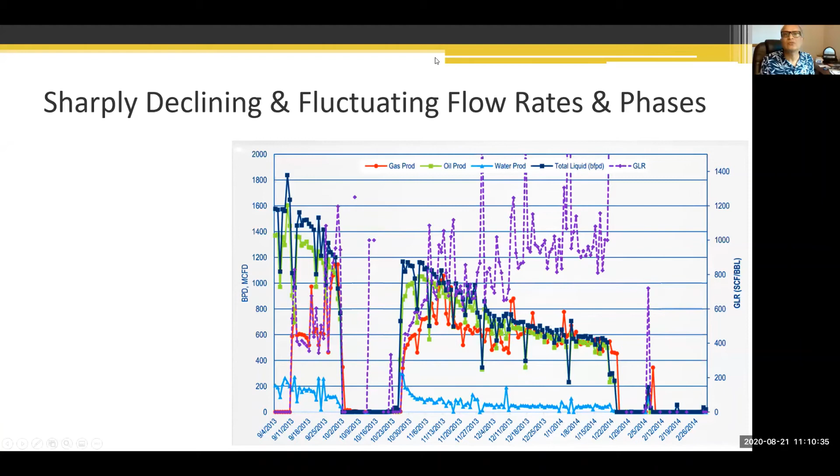So what I'm showing you here are measurements from 2 Eagle Ford wells. I pressed the same button again, let me see if I can redo that. My apologies everybody, how do I go to... am I sharing my screen? Yes, okay, all right, so third time is the charm.

I'm trying to show you here, there was a multi-phase flow meter taken on this well site in Eagle Ford. At 12:14, we're measuring a flow rate of 500 barrels. At 12:16, that dropped to 50 barrels. At 12:34, it picked up again to 500 barrels. Then it dropped again. So there's roughly a 12-minute cycle. I'm eyeballing it here, but every 12 minutes you have a big liquid slug followed by a very small liquid slug followed by a big liquid slug.

Here is another well on the same pad, same date, that we had measured. And what you're seeing is very sharp fluctuations. So the thing about unconventional wells is that not only do you have big production changes over a longer time period, but you also have instantaneous variations in the fluid rates.

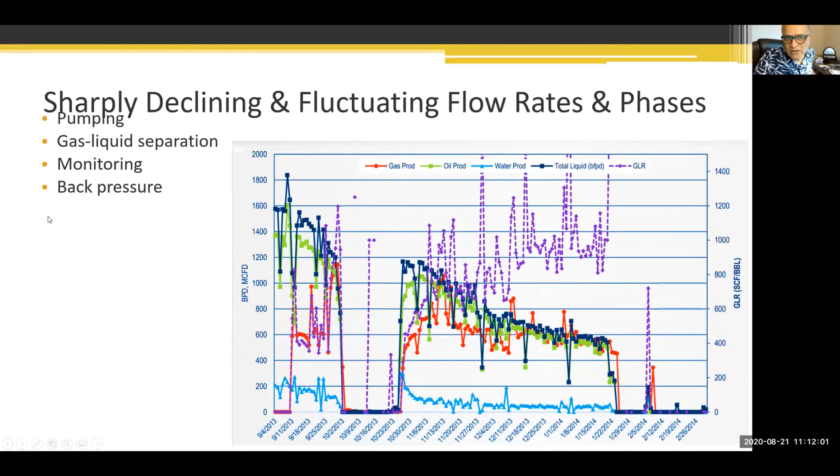That is what has turned artificial lift design, artificial lift selection, and artificial lift operation on its head. Pumping is a big challenge, gas liquid separation is another challenge, monitoring is a big challenge, and back pressure management too. We've begun to realize that as we see steep production decline in a relatively short time period, we need to plan for a wide range of production rates in a very short amount of time, with large fluctuations in those rates also. We have to rethink the entire way we approach lift planning.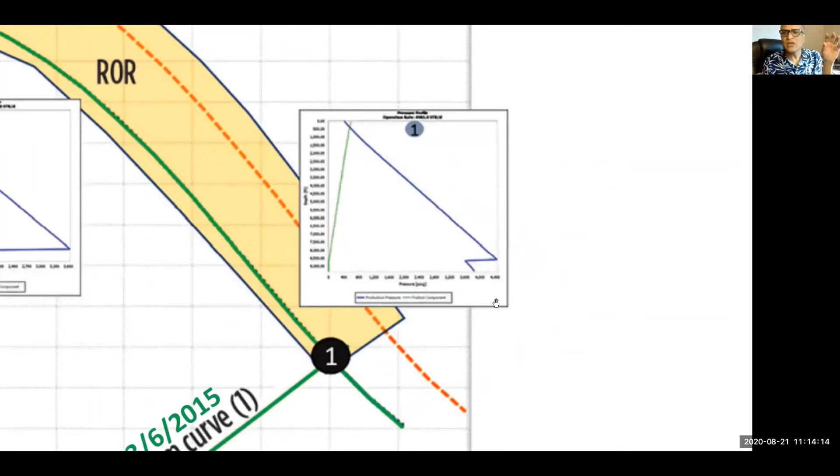So earlier, our need for TDH shown here was only this much. And all of a sudden now we need this much TDH. If I go another month into the life cycle of that well, the production dropped from 3,200 to almost 1,600, which is half, but the TDH requirement jumped up further. Now it is 6,000 feet compared to 1,600 feet just two months ago.

Until a few years ago, there was not a single ESP in the world that would have managed this transition. Most ESPs would fall out of the recommended operating range and die a premature death. This article is about how ESP technology has evolved, whereby we are able to manage these wide fluctuations in flow conditions over shorter time periods with the same ESP device.

But one thing I need to point out is that this ESP is only working within the recommended operating range, shown here by the yellow shaded area, for a time period of about a month. Even though it is operating here, it is not in the recommended operating range, meaning more electricity, and it is likely to fail faster. So this is another big challenge.

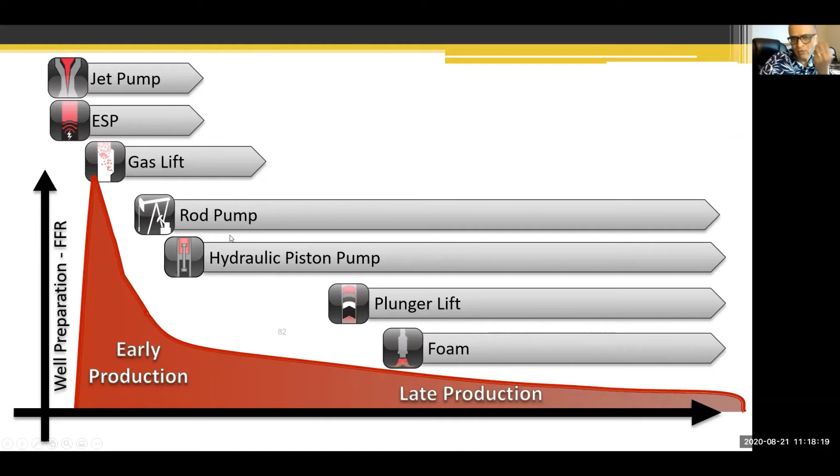Otherwise it would eat our lunch. And what do we mean by that? Our OPEX will go through the roof, we will not make any money, and we'll have to P&A the well. So artificial lift, on one hand, helps you enhance production. It can also hurt you if you do not plan properly, if you do not watch it, if you do not adjust it, right?

So one of the lessons that people are now transferring from unconventional to conventional is to bring the continuous improvement cycle. Some technologies developed for unconventionals are now being applied to conventionals to increase runtime and decrease failure rates, because conventional wells also have some challenging environments. Until now people said, that is how it is, we'll have to change it. But now people are saying, why should we change it? If guys and gals can do it in the US, why can't we do it in this part of the world? So that's an interesting shift in artificial lift approaches.

That brings us to the final part of my presentation.

Even though I said post-COVID-19 trends accelerator, this presentation could have been named as well, what is production optimization, what is digital oil field, and what it brings to the table in the current situation. Why did I add post-COVID-19 trends?

Because this part of the presentation is from my second distinguished lecture series, which concluded last year. I covered something like 30 countries, 50 locations in that lecture series in each and every continent except for Australia and Antarctica.

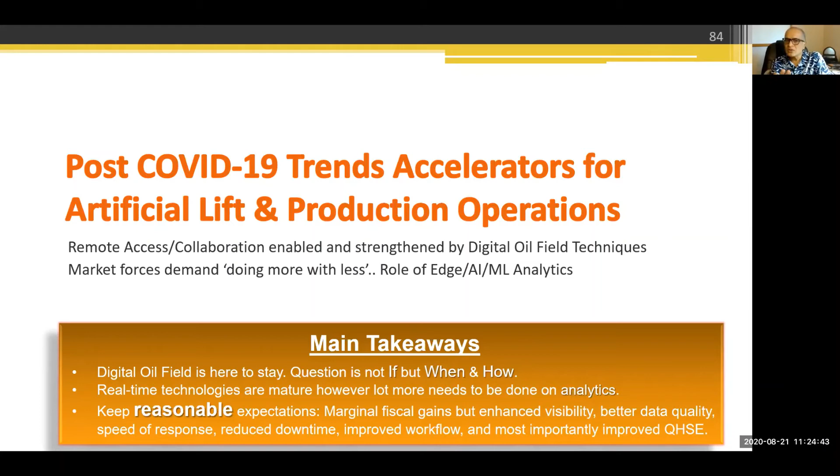So this is my thing about post-COVID. So let's talk about briefly what is production system optimization.

On the y-axis you have dollar sign, on the x-axis you have time. What you're seeing is the revenue versus cost curve. Whenever your costs start overtaking your revenues, you basically plug and abandon the well. We are talking about just the well or the facility, and that is the shut-in time.

What if you can come up with some way of lifting the revenue a little bit, as shown by this dashed line, and drop your cost a little bit, as shown by the second dashed line? What has happened? You have improved your profitability, which is the distance between the revenue and cost curves.

But another thing most people miss is that you have pushed your shut-in to some future date, meaning you are doing more with less for a longer time period. This is what people are talking a lot about, doing more with less. And you have recovered some of the barrels which would have remained in the ground.

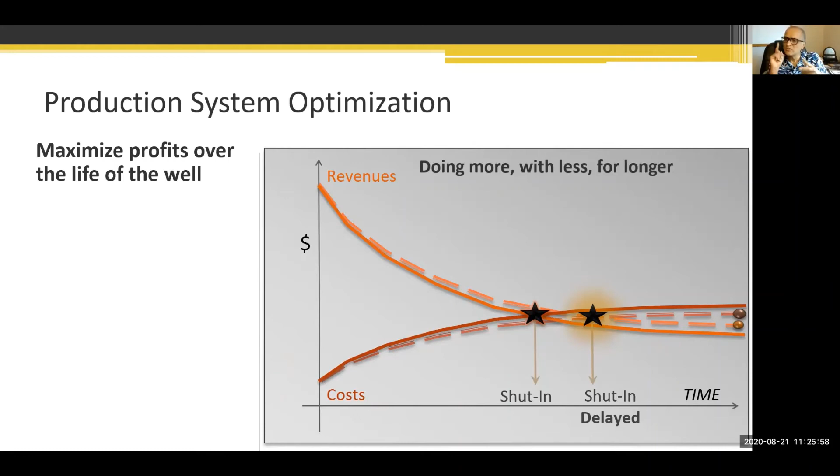That is the beauty of this production system optimization, or the promise of production system optimization, meaning you are trying to maximize not the production, but the profit over the life of the well. Part of that, a byproduct, could be maximizing the production.

But more importantly, you are also focusing on reducing the downtime, minimizing the OPEX, minimizing CAPEX, and improving the HSE part of it, because all of this has some impact on your bottom line.

So until now, this production system optimization was sold with the promise of increasing production all the time. But now we have to be talking about rationalizing production with fewer downtimes, less fatalities, less OPEX and CAPEX. So basically we are talking about extending the economic life of the field and the economic life of the well.

That is how our industry would survive. That is how we will survive personally also.

So manual effort, where we used to send people out to the field to go and read and see whether the valve is working or not - they worked, but one of the biggest causes of fatalities in the oil field happens when people go behind the windscreen. They start driving in some of the most dangerous terrain.

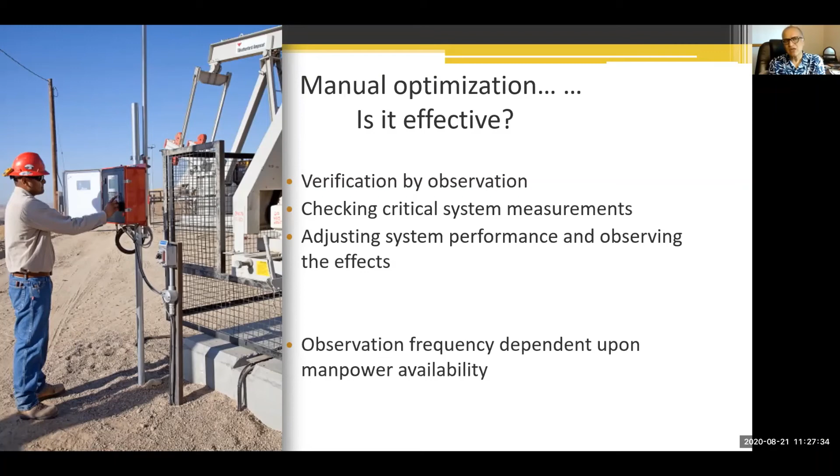So if we can avoid sending people out there, whereby we can access and manage some of the well operations remotely, then we can impact the QHSE aspect big time. Not only that, we can also focus on what to do with the data rather than sending people out to the field. So what is the infrastructure required?

On the right side, you're looking at different installations, whether it's a gas lift well, flowing well, ESP well, pipeline, or some kind of GC. You have some type of sensing devices, whether sensing pressure, temperature, flow rate, vibration, whatever. All of those data streams are flooding into this box.

That box used to be called remote terminal units, RTUs. They could be called controllers. They could be called PLCs, PLDs, or PID loops. Nowadays, people are using another terminology: edge devices.

Edge devices are a souped-up form of this controller, whereby you are doing more and more number crunching at the well site itself. Traditionally, these RTU devices were kind of store-and-forward type devices with limited on-site control. Nowadays, we are in the era of edge control - E-D-G-E.

If you have come across that terminology, what we are trying to do is put more and more powerful processors here, who can consume this data stream at higher frequency, who can do some autonomous action, or at least forward that information onward. So how do these boxes forward the information?

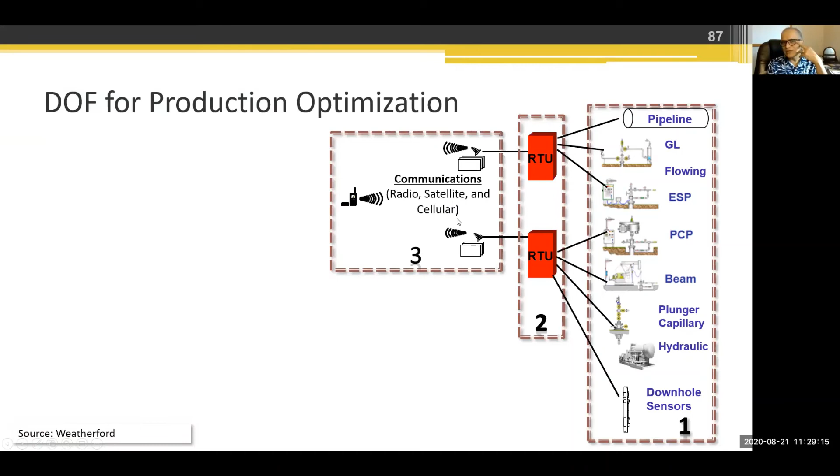There is a communication layer. You have either radio, satellite, or cellular based communication that sends this data signal to some data network.

Oftentimes now, increasingly, companies like Microsoft and Google are getting into the oil business because they are trying to manage the cloud for you, and not only that, they are trying to introduce analytics in the cloud for you. There are lots of, and that is one very promising career path for all of us to look into some of those opportunities, in my opinion. I mean, I'm an example of that - I changed myself whereby I'm focused more onto these areas now.

So you have this cloud-based network where you can have applications doing number crunching, doing some analysis. And then there are people in the field offices more focused on the operational aspect of the business, meaning how do I monitor, how do I control, how do I keep handle on the operations. Then there are some tactical people, strategic people, field development people, corporate accountants, supply chain people, data management and IT folks. And in between you have analysts, engineers, subject matter experts, and some service management companies as well.

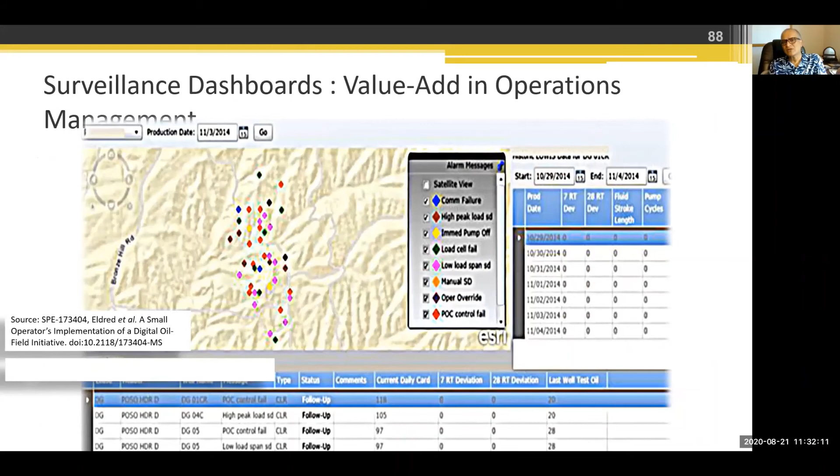Here's a picture I took from one of the SPE presentations from about a couple years ago, where people are showing how they are using this type of dashboard for value addition in the operations management of rod pump wells.

But now the time has come to think beyond those dashboards. These dashboards have been around since last century, and I'm not exaggerating. Some of the earliest versions of computer-aided optimization for operations were in place at Shell in the 80s, or even slightly earlier. But now we need to go from this retrospective dashboard to the future, which means going more into the descriptive aspect, which is visualization. Then we go into the predictive aspect, whereby we can predict before things happen. And then prescriptive, meaning what to do about it.

That's where there are significant productivity gains being promised by lots of companies coming into our space, not only our space, all spaces. This company I'm working with, Fathom Solutions out of Saudi Arabia, is a technology startup company, and the same type of paradigms are evolving there in different aspects, whether supply chain, utility, or oil and gas. Their CEO was telling me that more than upstream, he's seeing a lot more activity in other areas, because everywhere people are embracing this digital revolution. Some people refer to it as Industry 4.0, which is a big buzzword too.

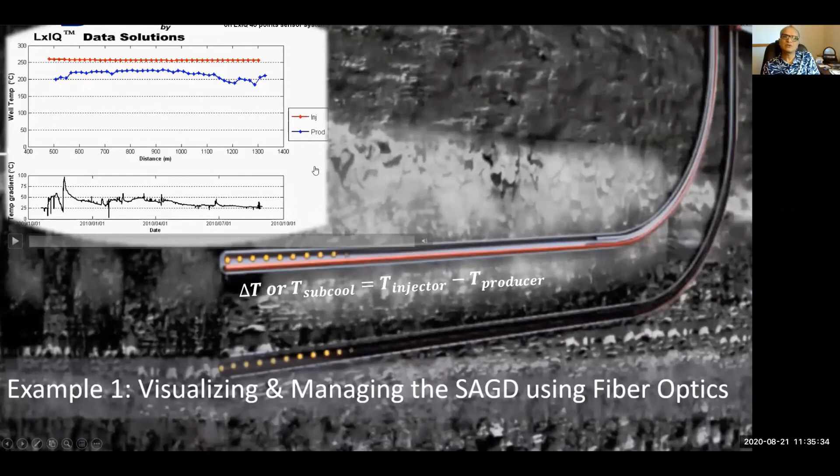So this is a small example of visual sensing. By the way, some of you eagle-eyed people would have seen that this is from the data of 2010 or so, right? So this has been around for a while, nothing new.

Remember what I said earlier, that we have to know what our reservoir is doing. So what is our static bottom hole pressure? What is the productivity index? These are some of the approaches that allow us to keep our fingers on the pulse of the well, so that we can make smart decisions, fast decisions, using some downhole gauge data, right?

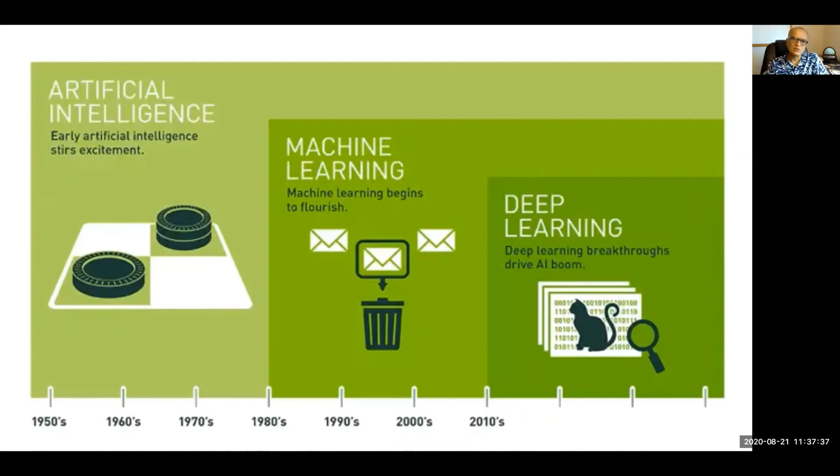What they are selling is effectively a hockey puck shaped device - if you are a fan of ice hockey, you can visualize the size - that they install on the rod pumping machinery I was showing earlier. That device has edge features in it, meaning it senses how much load it experiences and where the pump is in its cycle. Based on that, it develops what is called a dynamometer card. By doing this input analysis, they extract the features, meaning they try to figure out what are the important parts, and then they do some neural network based work.

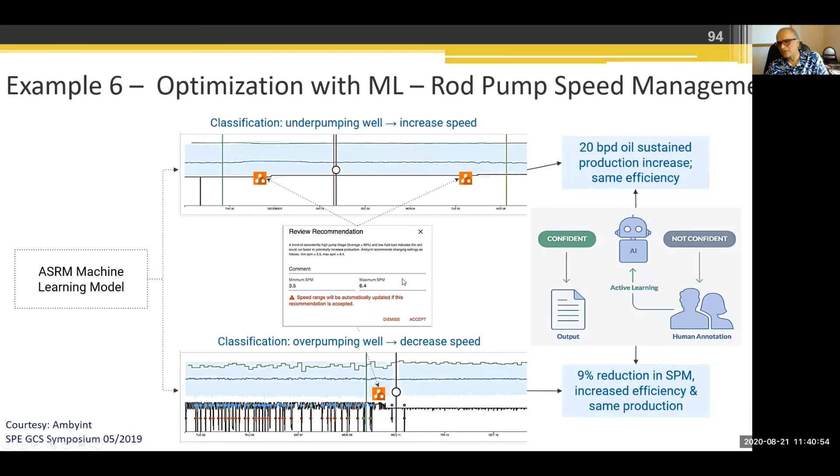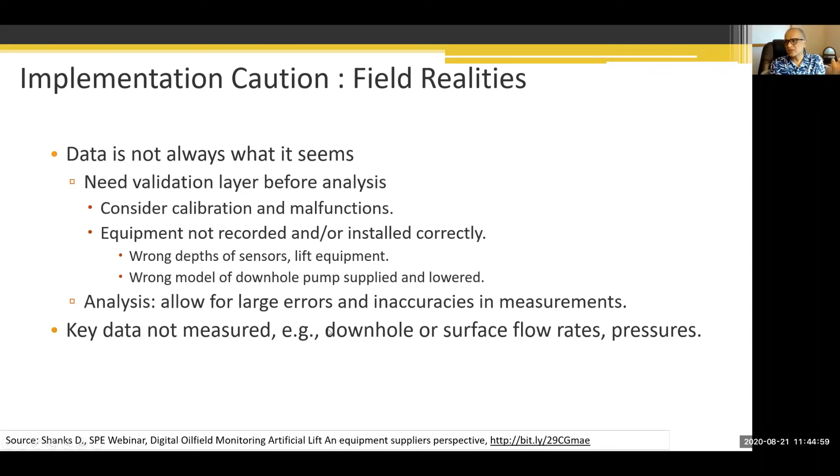So one important message that I often give is that unless company leadership is behind it, any of these digital oil field, edge, AI or ML initiatives typically remain focused in just one part of the company, or they fail. And that's where collaboration centers come in, that's another point.

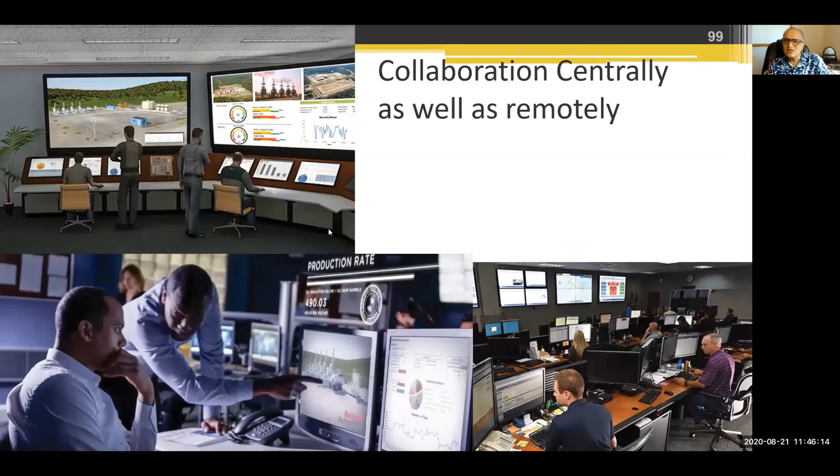In order to understand, analyze, design, and operate artificial lift, you require multiple discipline knowledge outside of production engineering. You have to know electrical, understand data structures, understand machine learning, and so on. Not a single person can capture all of that. That's where collaboration is a must.

We have numerous success stories out there. In spite of what I said, there is better and better data capture and transmission occurring. There is software integration occurring. AI, ML, edge devices are invading. Are we ready to evaluate them? Or are we going to take it on the face value of what vendors are selling us on?